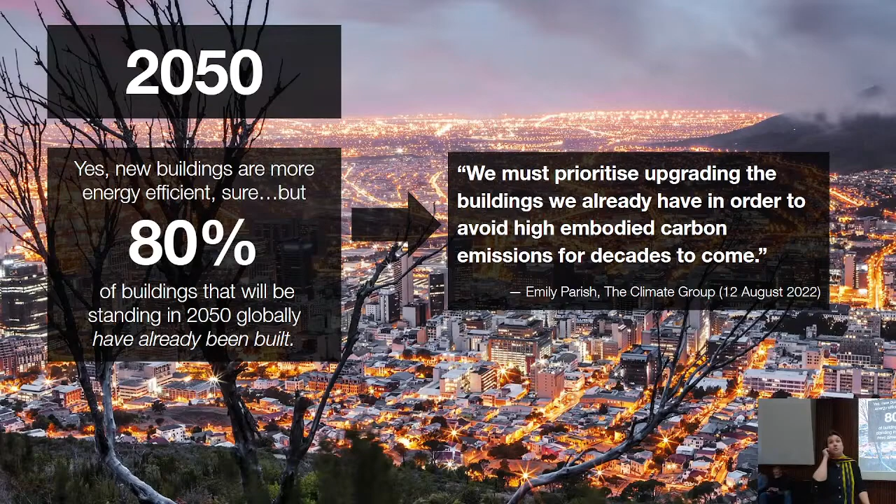In Africa, it's a bit different. 70% of the African stock still needs to be constructed. Africa is a little different, our context is different, but it's the same trajectory, right? And every 20 years, every city doubles in Africa, in size, scale, complexity, magnitude, everything. There's a lot of work to be done on this continent for the built environment.

But if all the buildings are already built, and they will be built very soon, in your own career, your 5-10 years that's coming, how long do we have to take care of these buildings after they are built? It's not just build the building, we already have the building. What about the life of the building?

On average, a building wherever you go, is 70 years old, including the one you're sitting in. It's a human lifetime. That's how old buildings are. They live longer than us, much longer than anything else we're busy with. There are buildings older than the industry of motor cars and vehicles. Buildings have lived beyond that. Buildings have lived through industrial revolutions. They're still here. So the average building is 70 years old.

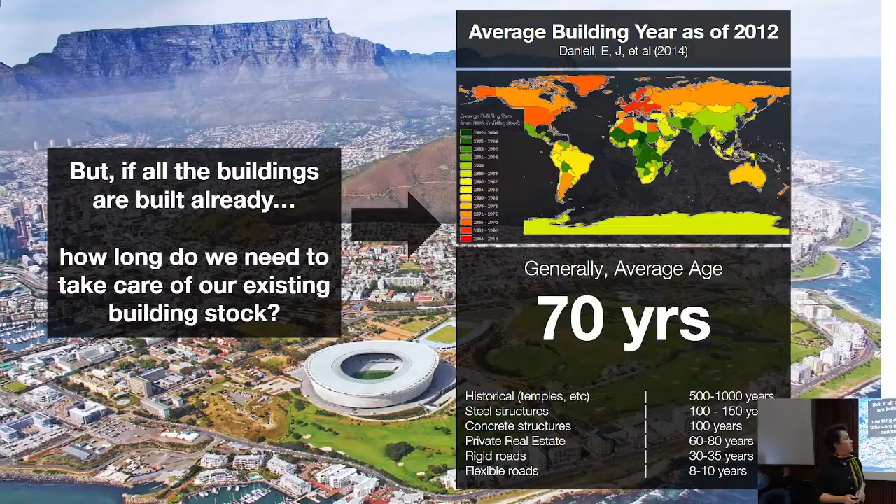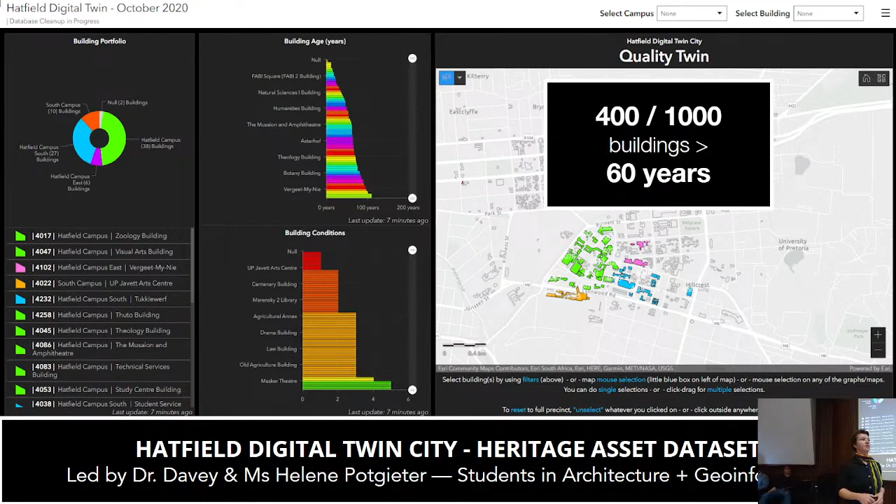You can see that in Tuks. The University of Pretoria is the second largest asset owner in the city next to the city. We have 1,000 buildings, literally. Right now, 400 of them are already heritage buildings, and that number will go up.

So if we talk about the life of the built environment and your job in it and the real big picture in your own lifetime, never mind beyond your lifetime, let's do some napkin math. I love napkin math. Let's pretend the average building design and development phase, average, maximums, is 3 years, right? Yes, there's exceptions now and then, and so it goes. But the average building takes 3 years to develop and design, right? And let's say it's 3 years to construct, okay?

And if you work in a high-performing environment, like Europe, America, Ireland, whatever, those high-performing regions, that time frame is shorter. It's almost 12 to 18 months to build and construct and be done with it. But that means 6% of our effort of a building's life is in design and construction, but 94% is in the life of the building. Operations, maintenance, use, energy, etc.

If you go to the doctor with this problem, what would he tell you? We need to think differently about the built environment. We can't do it alone. How are we going to create a human habitat that thrives? How are we going to do it in Africa? How are you going to do it in your own lifetime? What is your legacy going to be when you leave this building?

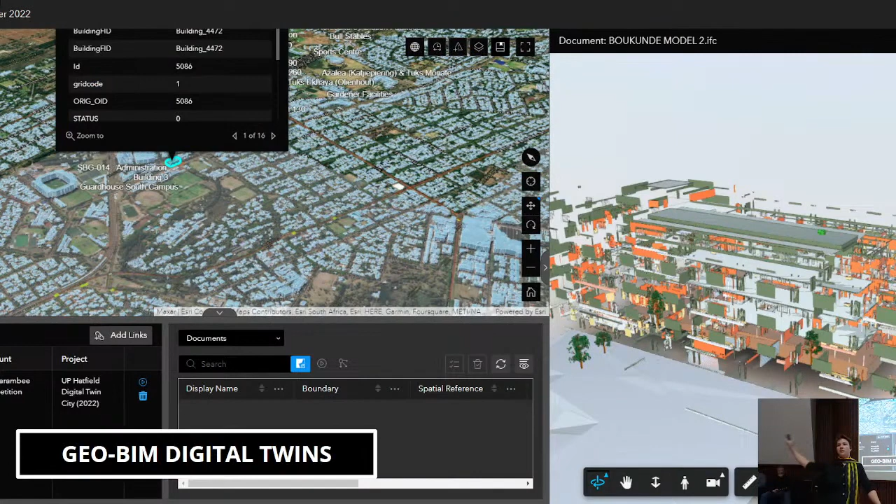If we can't build these future worlds if we don't do it together, it starts with human behavior. We can do amazing things with technology. Go and have fun this afternoon, go play with the toys. We can all do these things, but if we don't do it together, it doesn't matter at all. We can do incredible things, but if we don't do it together, there's no point.

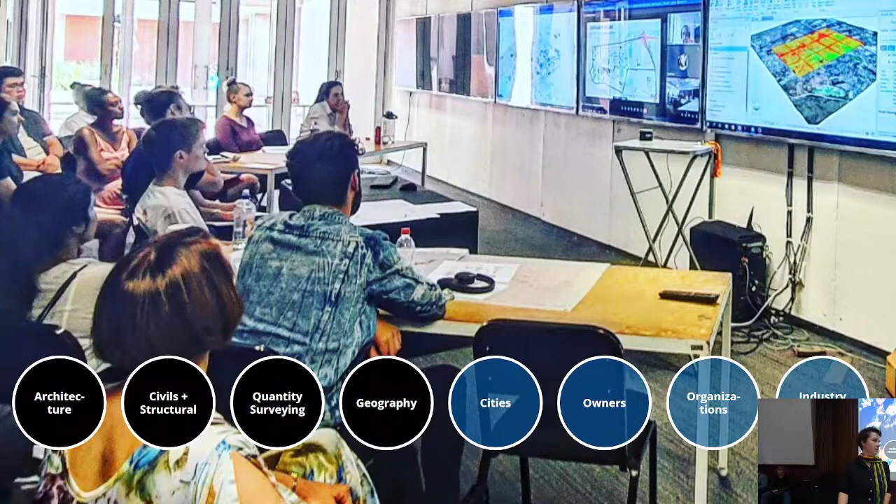And together means everybody must share a reality. And the digital world helps us with sharing that reality. It's very powerful in that way. The digital world helps us to come to consensus, to agree, to negotiate from the same page, to see the same world. The digital world doesn't mean it's not part of the physical world. It's interlinked. It's the same thing.

We're living in a social, digital, physical, interconnected 21st century. Doesn't matter your discipline, your story, your background, your personality, that's the truth. And the built environment must work together like that if we want to see thriving cities in Africa. End of story. So with that, our goal today is not to show you perfect projects.

That's not the point. The BIM Community Africa is here to show you how to behave through BIM to create projects. BIM behavior is the way we want us to shift culture, and we'll show that to you today.

With our team, I want you to start recognizing that it's a collective activity. There's no single person here in the BIM community or the value chain that has a hierarchy above someone else. It's a stupid idea. We're working horizontally, we're working together, and that's the culture we need to shift.

So with that, this is the community's ethos. I'd like you to think about it when you go into work. Leave your badge at the door. I don't care where you're from, I don't care what you know. If you're not working together, you're not working.

Do something good for somebody else first. We'll talk a lot about that today. And take care of the future while you do it. If you don't do any of this, don't bother working.

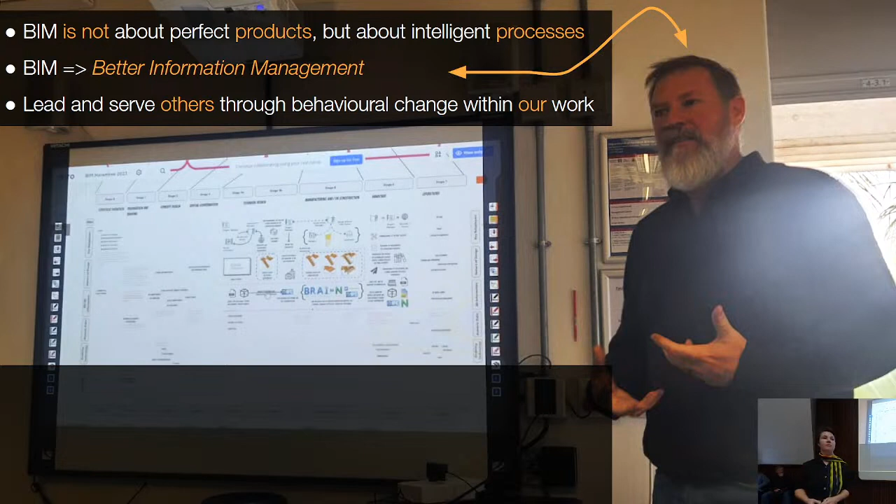Maybe BIM, as a catchword, is about better information management for someone else, as opposed to just for you. You don't matter in the team, it's us. Maybe BIM is about leading and serving others to help them come along on that journey. Maybe that's what BIM is about. Maybe we need to do that by changing our behavior, and show that to you.

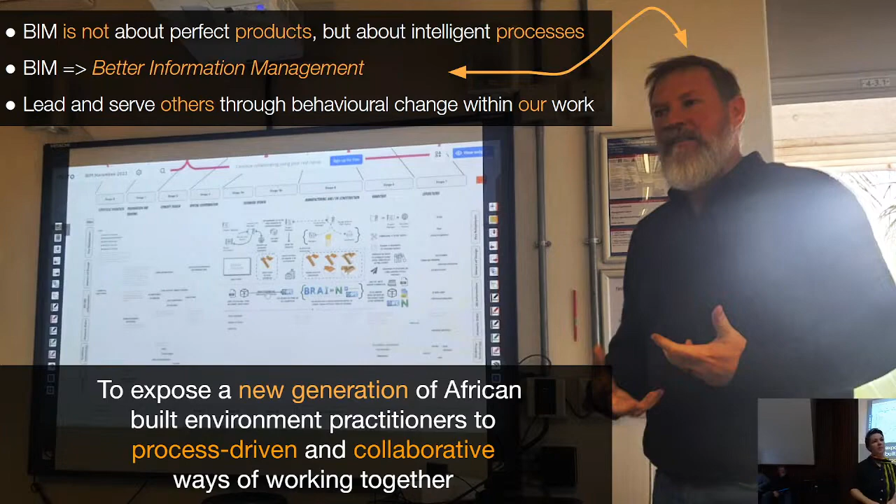So maybe BIMHarambee should be about making a new generation of African built environment experts and specialists who know how to do process-driven work, and who know how to collaborate together. Maybe that's what BIMHarambee is about, not the textbook. And with that why, our strategic definition of why we BIM, we planned BIMHarambee together to create the most value for someone else and to serve someone else. Do you see how different that is to traditional construction and design? Do you see how much better that can be if you work together from the start?

We have not designed the project, we have not lifted a pen to paper. It's not about that at all. It didn't cost us a cent to build consensus. So we planned BIMHarambee around those two questions as our strategic definition.

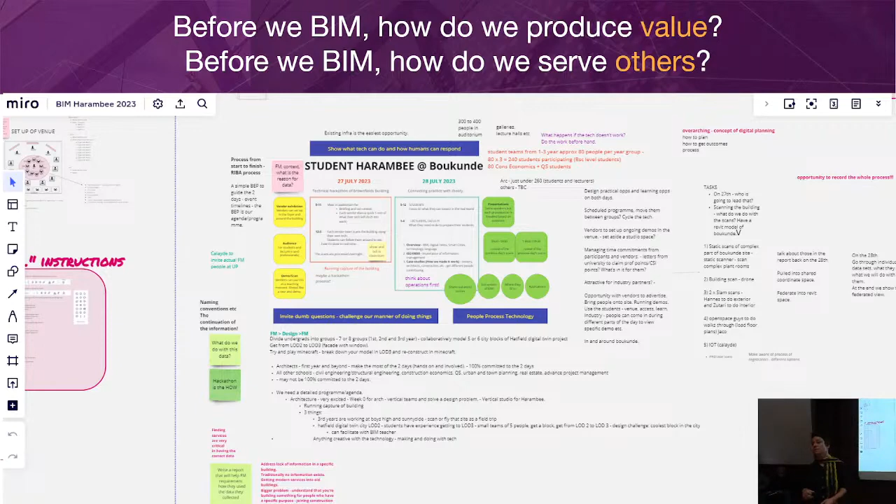So now I'm going to hand over, just so we have a bit more context, to Richard Matchett, who's going to talk about the what and how of BIM, and then we're going to launch our simulation for you. All right.

Morning, everyone. I'm a civil engineer, and I didn't really know much about BIM until probably about 7 years ago, when I started hearing about this acronym BIM. And since then, I've learned a lot of different things about technology and processes, but I've had to explain my job to my parents, and that's helped me break it down to manageable ideas.

When I explain it to my mom, I say, Mom, it's a process where we create information and we share that information in teams, and we use it basically to build stuff and to create value on stuff. Now, she understands that because my dad's an engineer. She's married to a family of people that are involved in construction. And it's been great to tell her that, Mom, we don't draw stuff anymore. We model stuff. And she's, what do you mean? Why? Well, Mom, because then we're able to share the information with teams and we get over all those bottlenecks that Dad always complained about.

And that's been a really great way to think about it in my own career, is as professionals and as you guys move into the workspace, that's the ethos that we're embracing more and more in the professions, is sharing information so that we can achieve really good purposes.

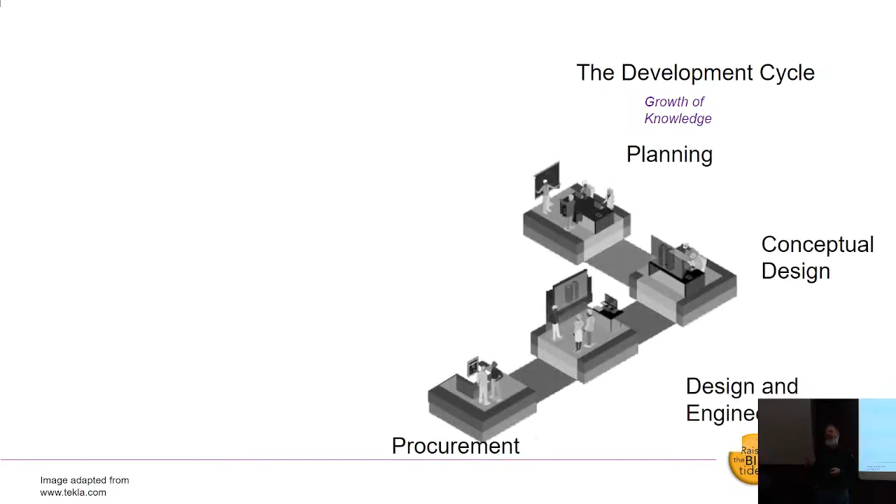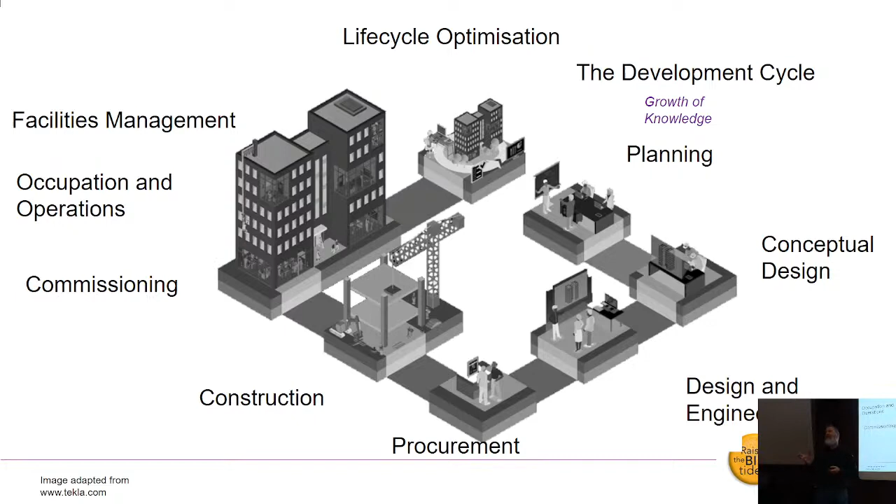Now, the way that this works practically is any project that you're going to be involved in is going to go through multiple stages. And so if you break it down between these different stages, there's a lot of work that goes into each stage. And ultimately going from design through construction into having an operating facility, whether that's a building or an airport or a pipeline or a dam. And that value is then created for the world that we live in, for the generations that are to come and for us to enjoy.

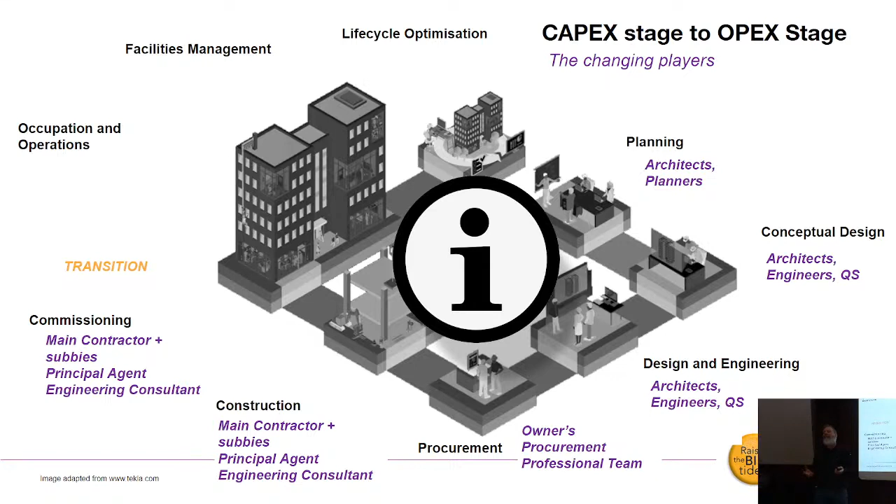But as this gets created, you have this incredible shift from us that are involved in projects, we create things, to other people who are involved with actually using those things. Historically, that's been a great challenge. Historically, the transition from the building stage to the using stage has been the challenge.

One of the big challenges is when you finish a project, there's a truckload of paper that needs to be given to the owners or operators, and it's very impractical. Whereas with digital or electronic information, it opens the doors to be able to search and find information and make better use of it.

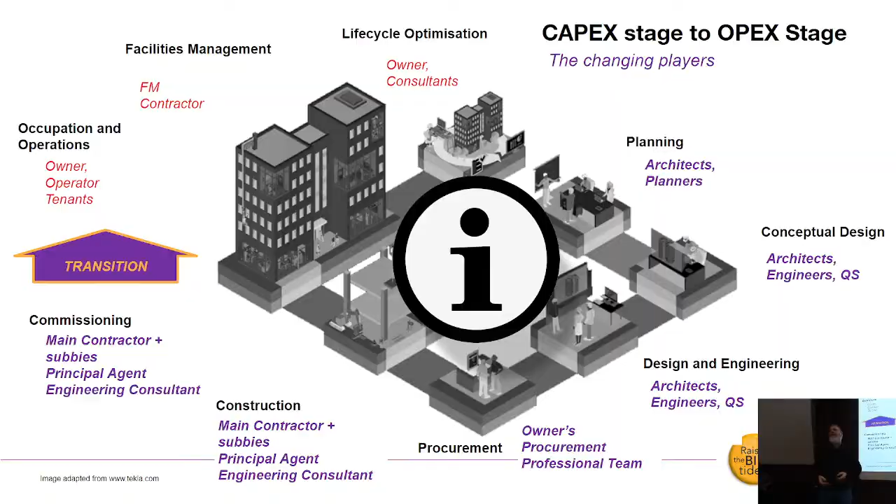As all of you know, we're in the smartphone generation at the moment. Information drives decisions, information helps you understand what's going on. The process of BIM is partly creating, partly sharing, and partly empowering the entire life cycle of assets that we're involved in. Now those truckloads of information, it's still truckloads of information, but now it's digital.

Anyone who's got a Dropbox account knows that your information gets messy very quickly. So it's very important to manage information, right? Otherwise it becomes a hassle rather than a help.

So you need a few things. Number one, we need a standard, because all of us, wherever we're going to end up working, need to work in a consistent manner. Otherwise it's very hard to align and get things done.

So South Africa, and most of the world, is busy adopting this ISO standard, which defines how to create the information collaboratively, how to share it, how to pay it forward, how to consider each other in the design, construction and management process, and how to make sure that the information is of a high enough quality that it is useful. You need a team.

We spoke a lot about teams, and one of the basic fundamentals around working together is: the better you share, the better you work, quite simply. The more you share, the more information drives understanding and common knowledge, the less mess-ups you get. That's a fundamental principle in any project.

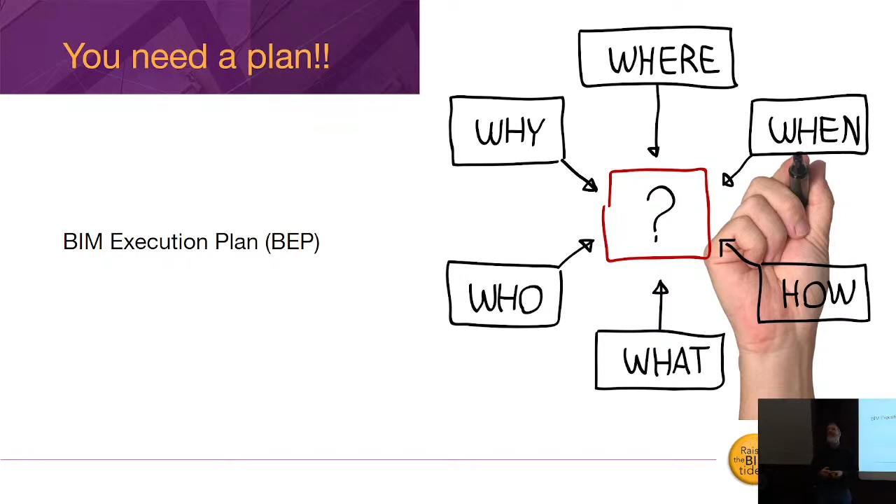You need a plan. You need to know who needs to do what, when, how, why, and that needs to be spelled out. We'll talk a little bit about that this morning.

Very important, you need a workflow, because you start somewhere and you end somewhere, and the steps in between can be very complicated. So more and more it's important for us to map out those steps in detail one by one, so that each person in the value chain knows what they need to do, how they need to do it.

And then you need some tech, you need tools, from computing power to measuring instruments, from things to understand what is, to other things to understand what will be, and to communicate that with all the stakeholders.

This is a bit slow, isn't it?

So how does all of that relate to our work? I'm going to come back to these stages and say that this stage definition that Khaled introduced just now is incredibly useful to plan the workflow throughout any project, from the beginning to the end.

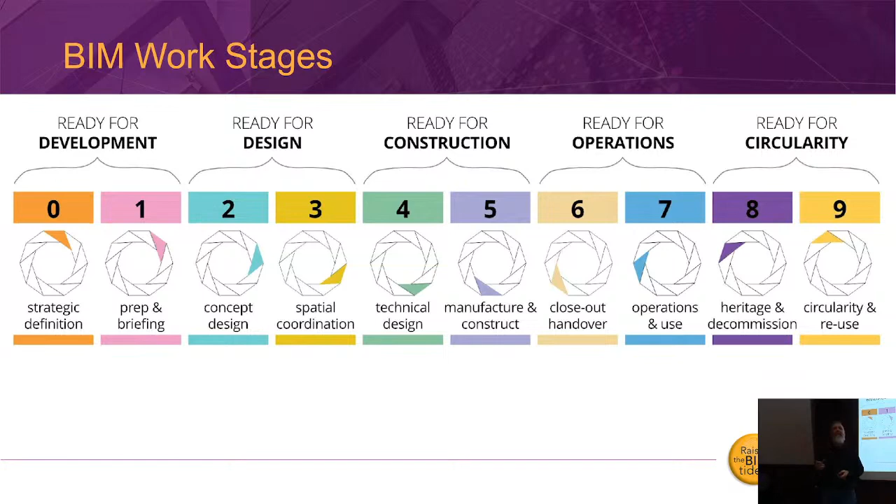For the rest of this morning's session, and then we're going to go and have a look at the exhibits and demonstrations, we're going to spend time looking at what happens in each stage. Then when you go out of this room, you will see what we've talked about briefly now in practice, and you'll be able to talk to companies using technologies or workflows exactly as we're explaining now. You'll be able to go and ask them specific directed questions.

And I encourage you to think about how is your area of study, where are you going to end up working, what type of work are you going to do, and how does what you see today spark an interest in how you think you're going to be doing things.

I also encourage you to take what you see today and blend it with what you're learning, the textbook knowledge that you guys are gathering at the moment, and start seeing today's information as a method of how you're going to implement the theory you're learning and turn that into practice in the world you're moving into.

So let's have a quick look over here. Strategic definition: we've got to find out what we're going to do. Khaled's going to talk to that a bit.

Then, as we get going on a project, before we actually start doing the math, drawing the drawings, figuring out the quantities, we've actually got to get that plan down. And a project plan is project specific—no two projects are alike. So at the beginning of a project, the whole team gets together, like the photos of us sitting together, and figures out how we're going to get this thing done.

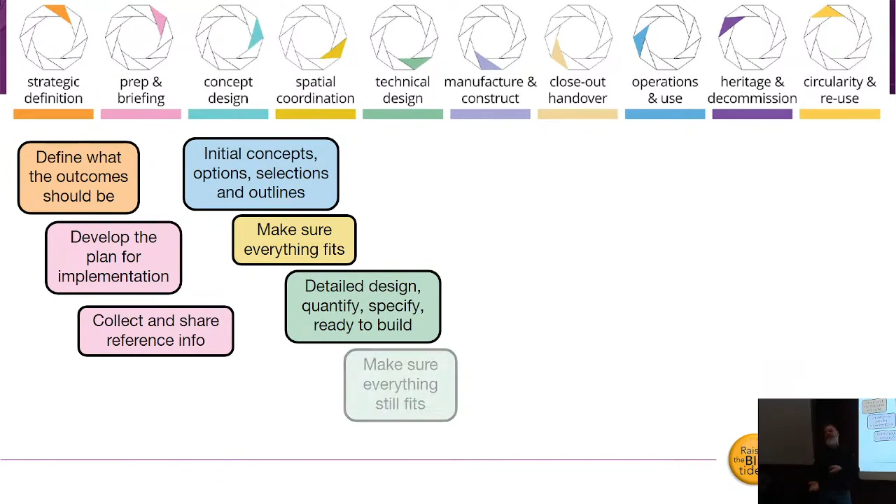From that baseline, we create our initial concepts, make sure everything fits together, then go into detailed design and planning, where all the different disciplines get together to make sure it still fits. Something that happens all the time is you get a great concept, start designing it, and things fall apart. A big part of what digital technologies and design enable us to do is keep fitting the pieces together through the design and development phase.

Then someone tenders for the work and starts working on it, and things get really exciting. The yellow machines arrive on site, you start digging holes, building walls, building things. As a professional team, we need to make sure we can see if everything is still on track and happening as planned. At the end of construction, is the end result properly recorded so we can hand it over into operations, go through the operational phase, and ultimately arrive at end of life—preserve or change.

So that's what we're going to do now quickly for the next hour or so. I'm going to put this workflow on this screen, and as we go through the storytelling, different people will come tell you what's happening in each of these blocks. As we move through this, new speakers will come up—keep track of where we are in the storyline and in the demonstration.

Here's a quick hint: this building has been set up with the pink areas over there for collecting reference information, in the basement. As you go through this timeline, we go up the floors. Depending on where you start, and how we leave this room afterwards, you'll be able to see everything happening in sequence. So keep track of the presentations on this board, and you'll be pre-educated when you arrive at the stands.

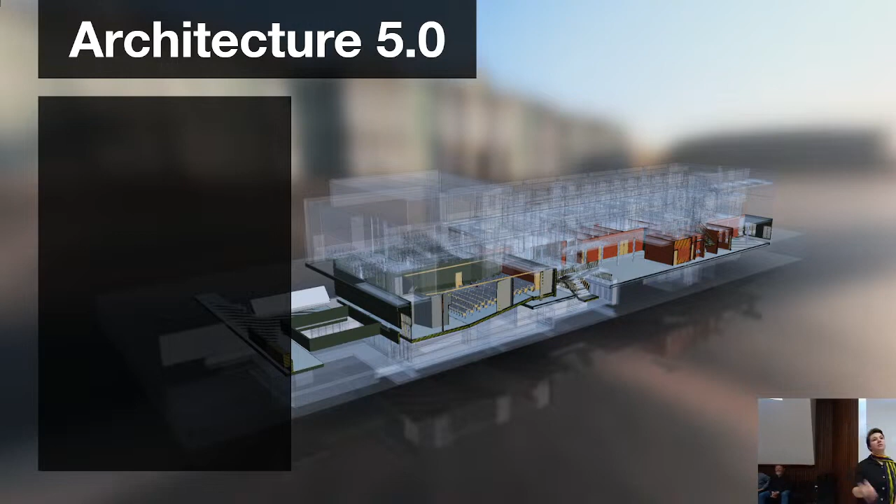We looked at our building and asked, what kind of project do we want? The interesting thing is, I as the owner didn't come up with this idea, the team did, because we were talking about it together. I still am shocked by that. As an architect, I should have the big idea.

But the team, because we were talking early on about purpose and culture, said sure, we must stay within our constraints. We have a limited budget, we have no money, that's a fact. So we can't go crazy on that. That's a constraint.

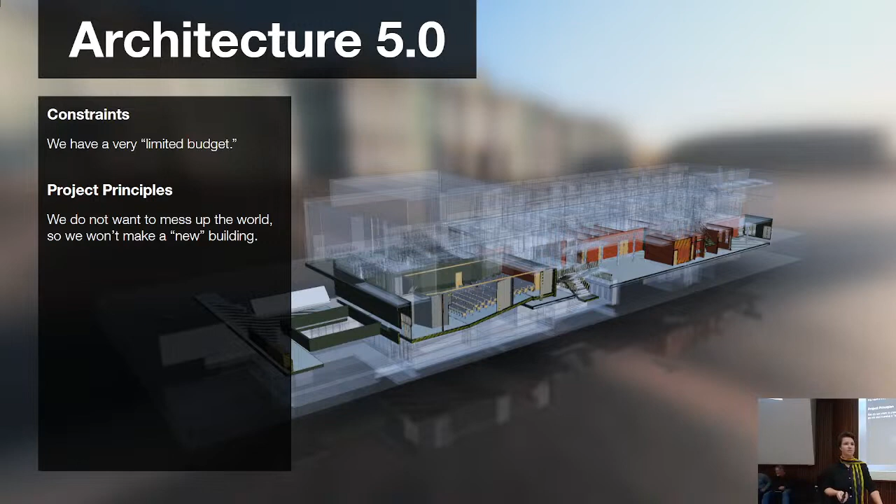It must be more awesome than any other building, and it must be awesome for students and for learning to take place. That's a principle. It must be way cooler than Engineering 4. Way cooler.

With these principles, the team said, shouldn't we build a kind of building that aligns to these things? The most sensible thing to do is add two floors to the top. The building is strong enough, it's good enough. That's our plan. It aligns to all the principles, it fits into the constraints, it sets up our values together, it's possible for us to do it. And we've not lifted a pen to paper.

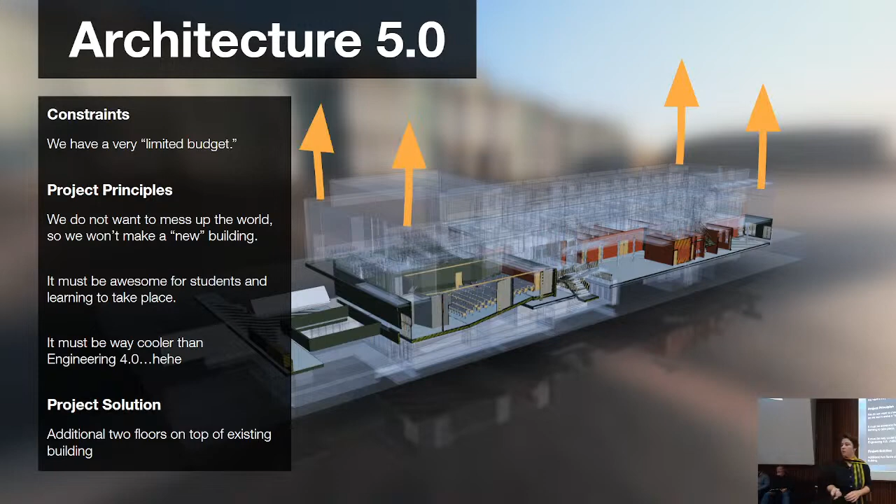So here we go, Boukunde Architecture 5.0, that's the project for us. We want to put cool new labs and workshops on top, and a lot of creative environments to practice and make a mess in. It must show off all the topics we're interested in, and these topics will change.

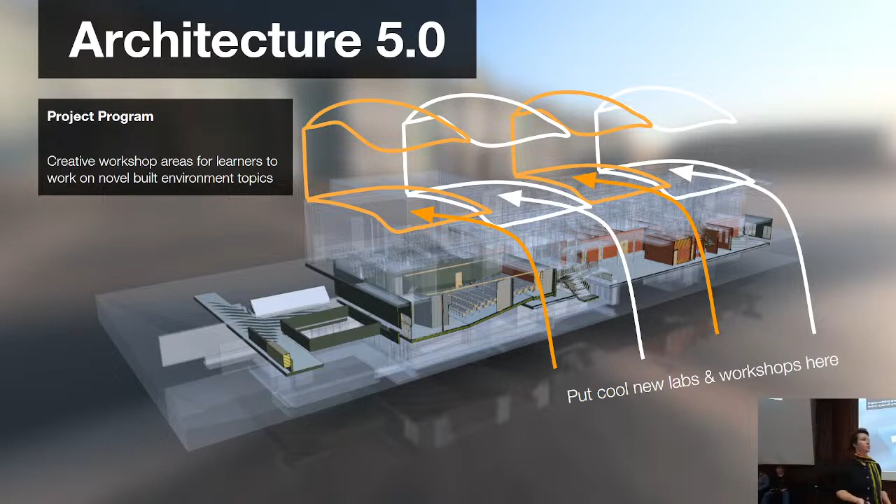These topics today include the York timber chair and timber construction, living walls and green buildings, flexible facades, climate adaption, cities and futures, and digital learning. This is the stuff we care about. We need to practice in that. We want those labs to do it.

So as a team, we're very clear on what the project is and what it isn't. We have not lifted a pen to paper.

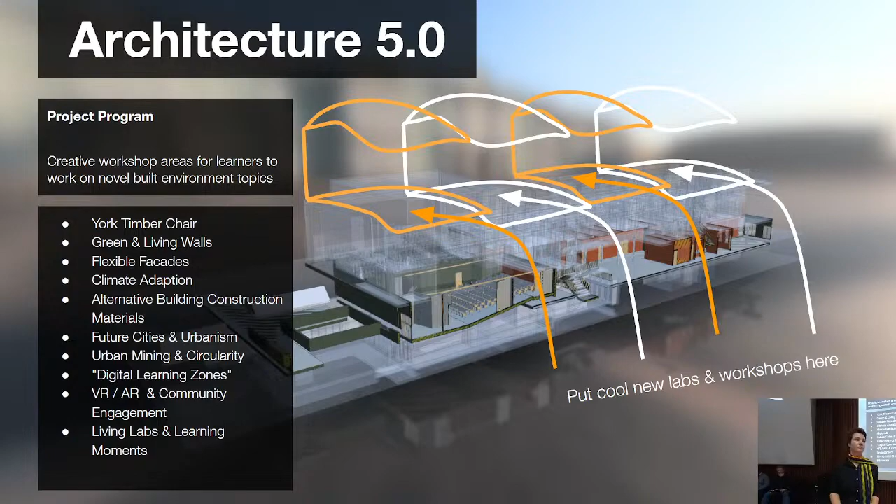My job as the owner is to say, how do I take care of my team? What do they need from me to be successful? And what kind of information will the building owners of the future require? How do I act responsibly now? In BIM, I need to take care of four things.

We call this the information needs, and there are other ways of describing it—read your book. But for me, my job is to take care of the OIR, AIR, PIR, and EIR string of information: the organizational, asset, project, and employer's information requirements, for the people who use the building forever.

So I'm not going to go into detail, but the question I ask myself as owner for the OIR is, what information do we need from this building and its design process to ensure that we make good decisions in the future and others can do their work? In other words, I build a client to-do list for now and for later, right at the beginning, before we lift pen to paper.

I also start asking questions with my team, and I find out from them what essential information they need to be able to do their job well. I don't prescribe it, we work together. I ask them, how can I serve you as the owner, as the client?

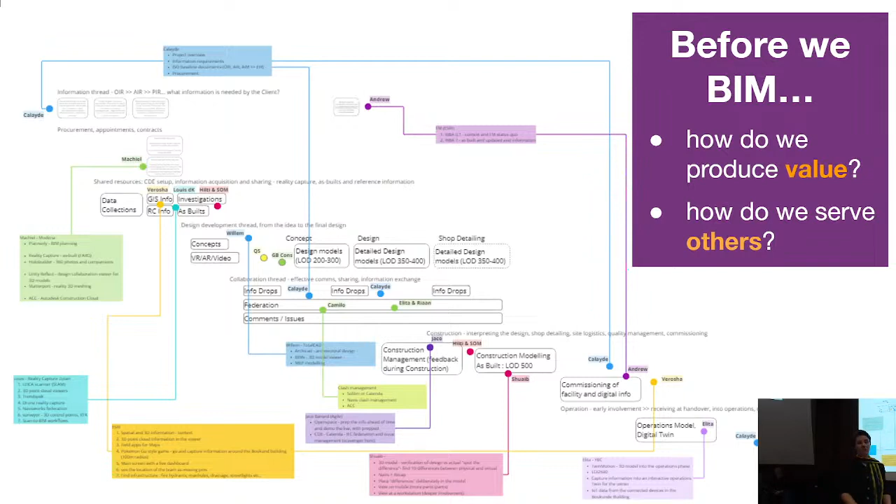This costs us nothing to have a responsible conversation. Nothing. So now that we know how do we produce value and what we serve and what kind of building we have, now I can say, let's start. And this is how BIM kicks off.

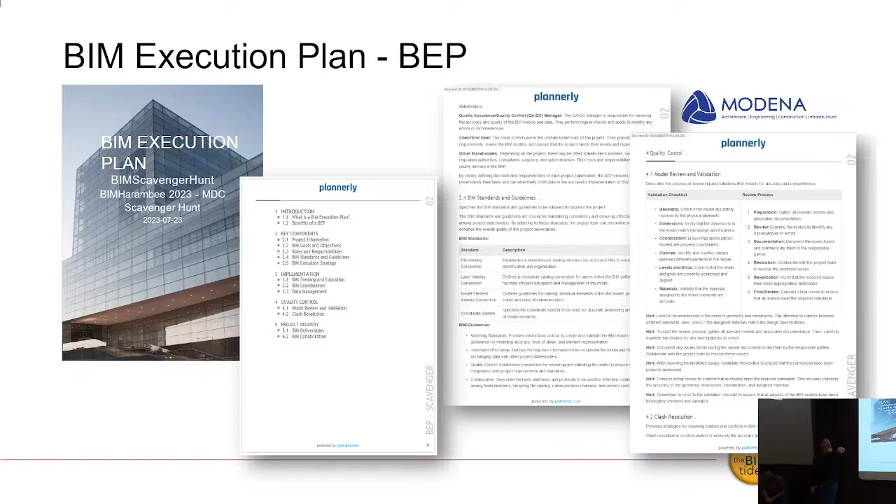No, it's you guys. Wait. There you are. All right, I think you're going to press that one very close to the machine. Okay. Stand in the block. Stand in the block. Stand in the block.

So what is geospatial information and why is it important? So geospatial information is the concept of the whole Earth having coordinates. So you already make use of geospatial information on a daily basis, and I'm going to prove it to you. So let's say you want to go from point A to point B. Let's say from UP to a specific shop in Johannesburg. How would you get there?

Waze. Maps. Am I right?

Waze and Maps make use of coordinates from point A to point B, and that's how you navigate. But that's just in a very inaccurate form. So what we want to speak about today is how to take that information and make it more accurate—think about better accuracy.

Point it at the computer. Yes, sir. Yes! Outside. Thank you, all right.

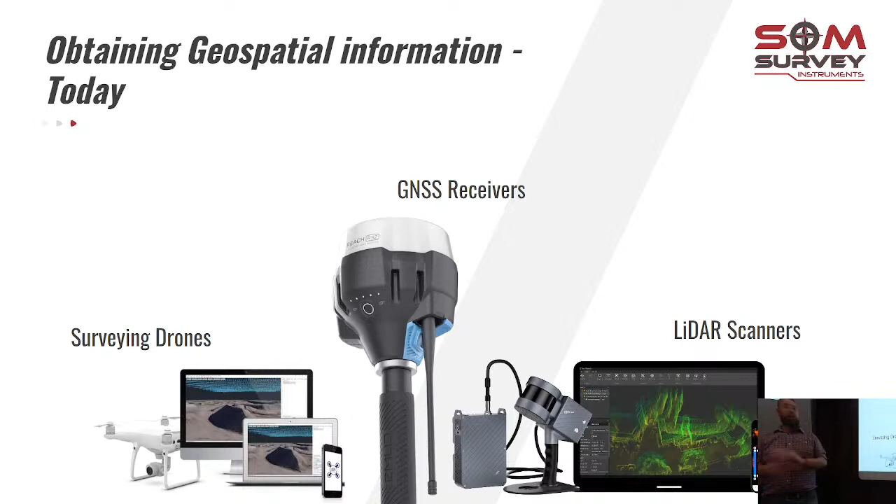Louis de Klerk, I'm from Zutari, and I'm our reality capture lead there. We're talking about collecting and sharing information, and as an industry we call this basically reality capture. It's a term that's been around for a few years now, but it's not that common yet. To summarize, we digitize real-world assets using technology and software.

Where's the rest, Richard? Something is... Keep going. Okay, I'll just skip over that one.

Then drone photogrammetry. There's no real such thing as a drone survey. A lot of people ask me for drone surveys, but they don't really exist at this point. So we stick to drone photogrammetry.

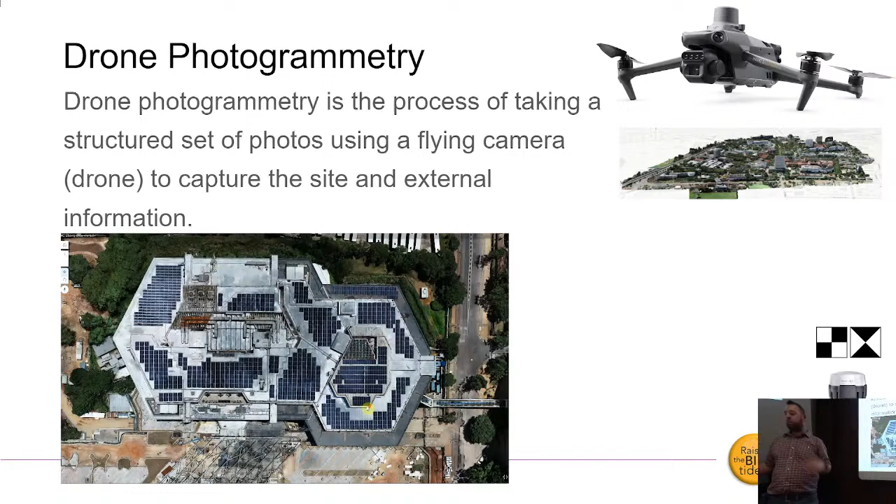Next, we'll need the inside, and that's where 3D scanning comes in. Using LiDAR scanners, you get them in handheld SLAM - simultaneous localization and mapping, for those who haven't heard that term - or the more common stationary scanners on a tripod. You move them through the building, all in various accuracies, but they capture the insides of a facility very accurately.

Putting a high density scanner in a room like this will take 2.5 minutes to capture each and every piece of wood, speaker, light fitting, everything that's in the room, and you'll have it in 2.5 minutes. Obviously you need to do a lot of work downstream to create the actual model, but having that reference information is the step on the inside.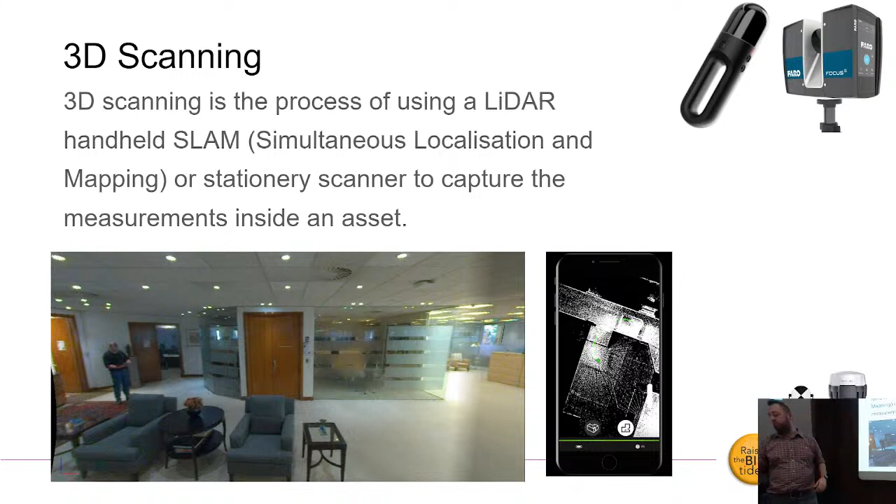We supplement that with 3D images, and OpenSpace is going to talk about that a bit more later, but having the visual component brings in the condition of what that element actually is.

And then what does all of this deliver? In the end, we want to talk about information. We need information, not just pictures. The pictures are great, but we need the survey control, so we need those coordinates. The drone photogrammetry provides us with point clouds, 3D meshes, ortho photos, digital surface models, digital terrain models.

So a lot of information used by various parties downstream to plan and design their work. The 3D scanning provides us point clouds - it doesn't provide us a model, it provides us a point cloud. So again, the reference information to take us to the next step, plus 3D meshes and the 3D images.

And all of this has quite a bit of benefits. We've got rapid data acquisition - you can capture a building like this with a scanner in a day easily, and you've got all of that measurement information while the drones are running on the outside. That information is geometrically accurate, like VM said as well, talking about relative and absolute accuracies - that's where this technology comes in.

Creating virtual site visits - Glade mentioned carbon emissions and vehicles and all these kinds of things. Bringing a site that's sitting in the middle of nowhere, or 500 kilometers from your office, back into your office where the rest of your project team can actually view that information and understand it. There are projects where people designed some of the biggest bridges in the world, sitting with a lead designer and 10 people underneath, and they've never been to the site where that thing is being constructed or designed.

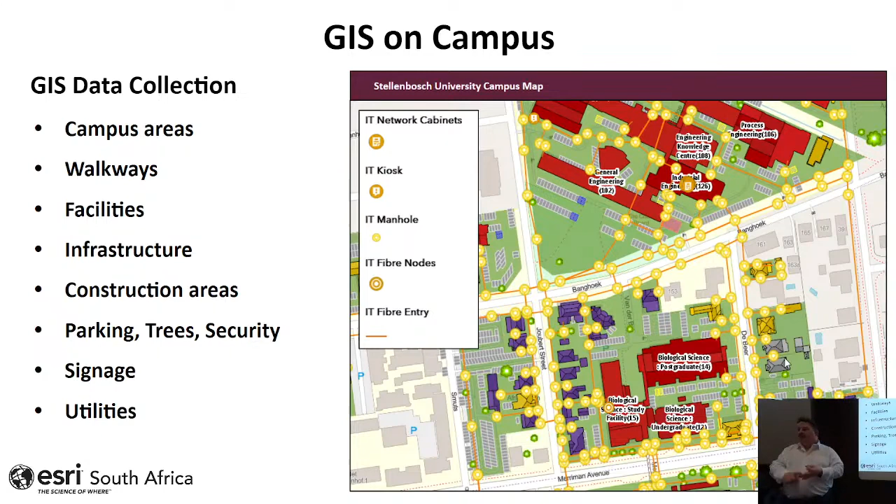So GIS brings all of this together and helps us to understand the environment. What we also want to show, and our stand down in the basement, we're going to show you a little scavenger hunt where you can go outside and collect some of these assets. The idea is that you would use a mobile application, which can be disconnected as well, so you don't have to worry about having data.

So you can go out, it will navigate you to the location of that asset, you can verify the location, you can verify the condition, and this is where you also use devices that can be very accurate. But then you can go back to that meter or that transformer and actually get the condition assessment of that. So these are the type of examples of mobile applications. No programming required, you don't have to develop this. This is out-of-the-box tools that you configure, and you add your own type of questions and things in.

So what are the main takeaways that I want to leave you with? GIS is about where to build, about the site selection. It will help you to do the site survey with all these fantastic tools that are being showcased here today as well, but it will help you to find out where is the best location. We use it within the retail, within banking, within mining. All these type of things are being used even with agriculture. Site selection is quite an important part of GIS.

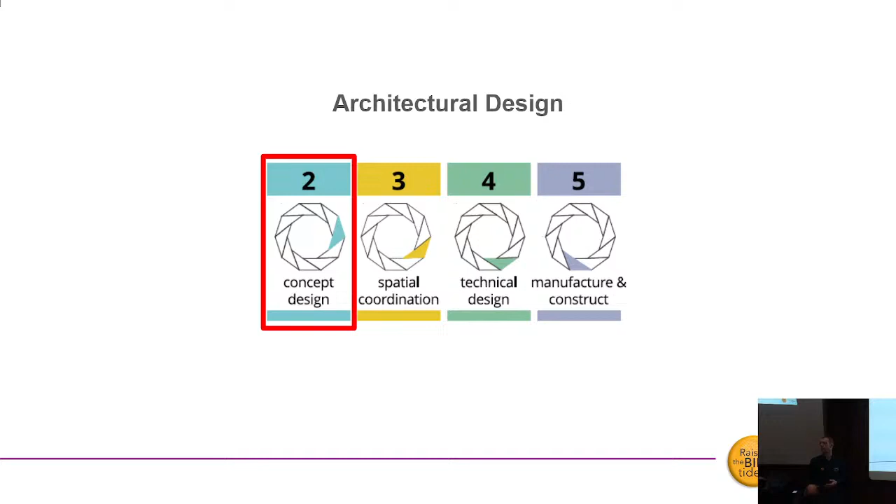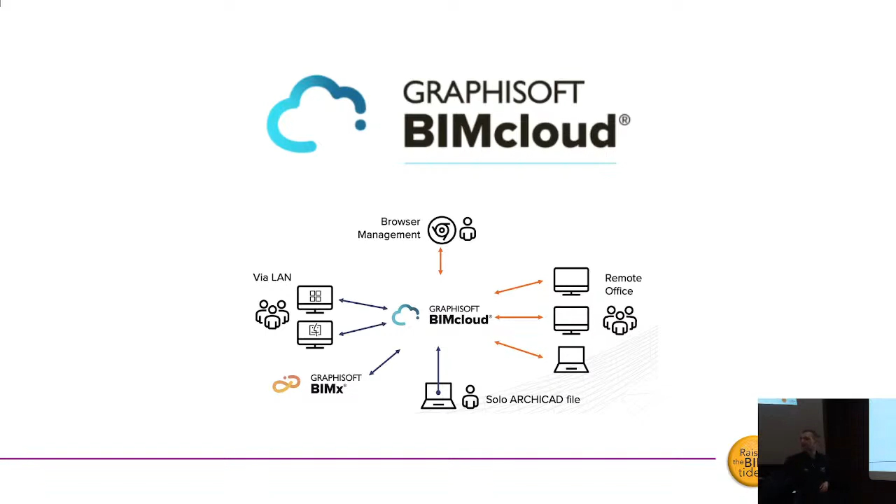The architectural team collaboration, the internal collaboration of the architectural team, we use the Graphisoft BIMcloud, which is basically allowing us to work remotely over the internet with no delay. And obviously, as you guys know, with pandemics and all of these things, it has become a necessity. So our team consists of 3 members: Ronel, who is in KZN, we also have Gert, who is in Cape Town, and then myself, who is based inland.

The BIM authoring tool we used here is ArchiCAD, which supports an open BIM workflow. This gives flexibility for all sorts of vendors to partake, making it easier and more open for more people to bid, instead of having a closed ecosystem which would mean fewer possibilities for certain people to join the project.

Starting off, before we could do anything specifically, we had to import the existing data. That could vary from a specific 3D format - in this case, as the BIM execution plan stated, we used IFC format, an open BIM format, Industry Foundation Class, and other information available. Not everything was in 3D, so DWGs and PDFs, whatever you might have, we had to bring in too.

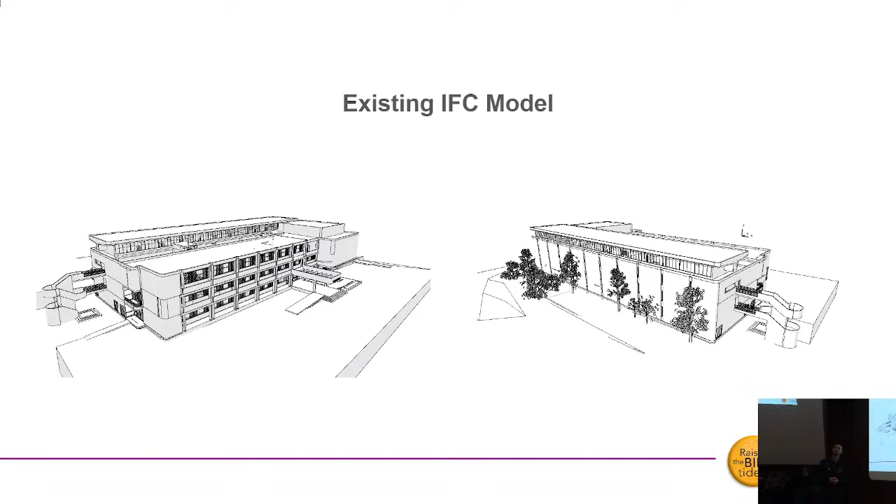Then we shared the project on the BIM cloud, which is only internal at that stage. There's the existing IFC model which we've imported - before we did anything further, we got this from the client, and I believe it was done in Revit. We found the IFC file on the CDE and imported it.

It's quite important to get certain things right from the start in a project, as mentioned before. There are different things you would do to make informed decisions. A lot of decisions are made in the beginning of a project, at stage 0, 1, but also at stage 2. Certain tools like energy analysis, which is quite important, can help us make informed decisions in the beginning of a project.

I think it's quite important to make sure we involve all project stakeholders from the start - that includes facilities management. I don't think that happens often in today's projects, and I think it's important to consider that concept, because if everybody's involved in the beginning, we can know everything from the start and address it accordingly, rather than having to make plans down the line, which usually happens on site.

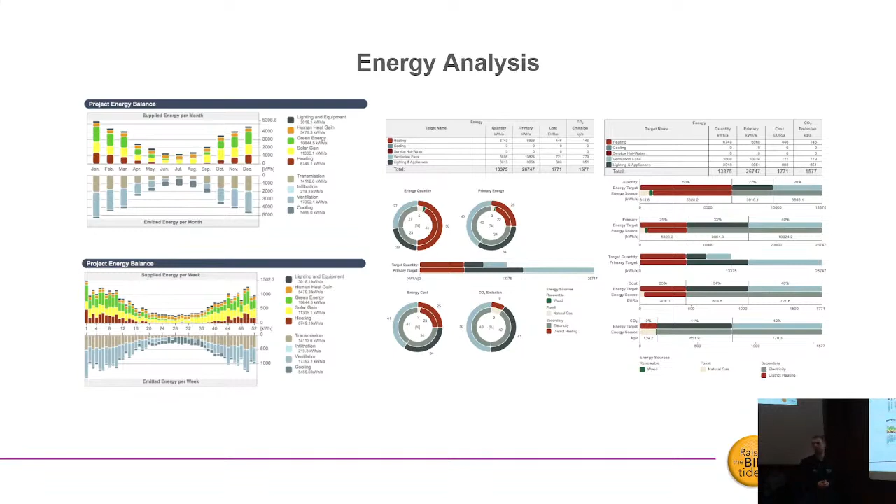So how do we collaborate and talk with the rest of the stakeholders on this project? There are two different options - in this case we use IFC, Industry Foundation Class, and BCF. The IFC is for model-based coordination. We share IFC files back and forth each stage, maybe not so much in the concept stage, but going further definitely - that process repeats where we export IFC files for the rest of the professional team. They then import that information and do what they need to do, and collectively we develop this building.

The BCF is mainly for issue and change management. Any changes or issues, once all of these IFCs are federated into one model, allow us to do things like clash detection, which you'll hear about more later.

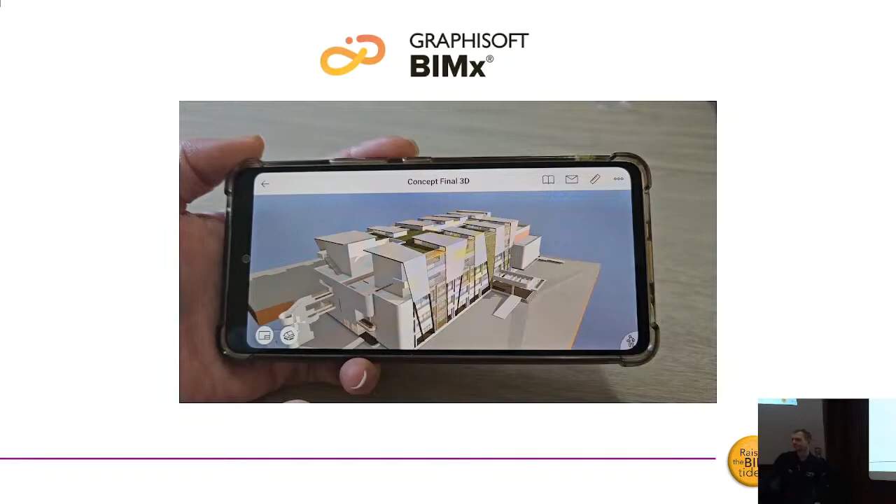One of the tools that gets used quite a lot is Catenda. Camila is going to come and tell us a bit more about that.

There are a number of different tools in the market, and I hope as you look at the examples we're showing you this morning, it's not because we want you to use specifically that or this tool, but to help you see what this functionality looks like, and keep track of this golden thread of information from beginning to end, and how the different tools would enable you as a professional to keep track of the information and make sure that together the team is able to yield the outcome desired by the client. Camilo, over to you.

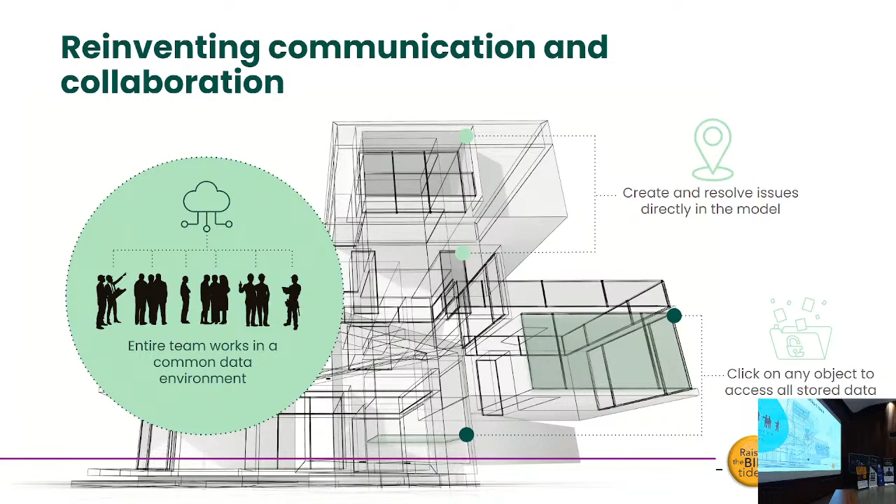Furthermore, we are not managing our own design. We are managing other people's design, and we're managing through different devices. We have the computers. We used to have the table where I learned to draw. Now we have the computers, but we have the cell phones, we have the tablets. And those things are becoming part of our life, in a way. Part of that environment is communicating not only in that space, but through those devices that we are using. And they are evolving. Maybe someday they become part of our bodies. I don't know.

So this is the central environment that is receiving all the information from all the different consultants. And I think what's important here, and I want to show you this typical screenshot of where I work and spend a lot of time, is that it's not a place where we drop the information. That has changed. It is a place where we take that information, process it, and then make decisions based on those conclusions. It's becoming a new paradigm in that sense, because it's becoming a space by itself where we can make decisions based on what we pick up from those models.

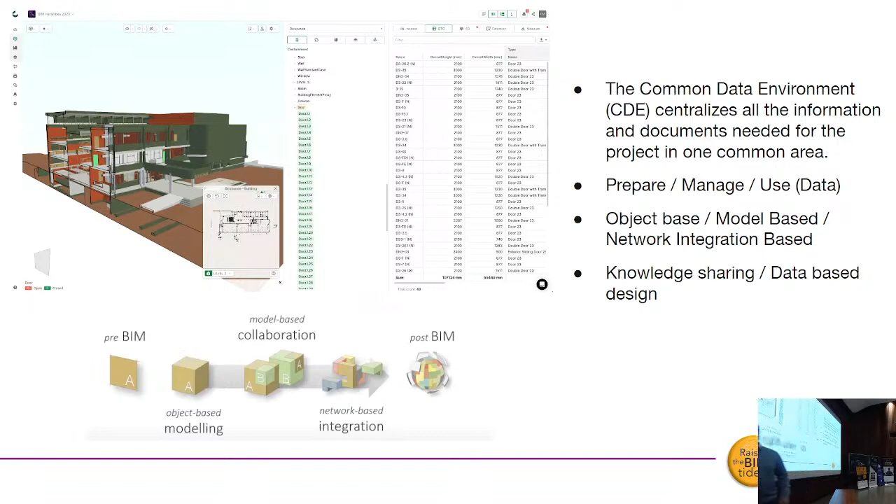It's not just a space where to drop information. This is a very important concept for you to use, because as architects in the future, you will be dealing with drawings, with models, but you will also be dealing with other types of information, like data, spreadsheets, that have nothing to do with what we are used to, but are part of what we have to deal with in the future.

So at this stage in the project, we've got a concept that the client loves. We've got all this information, and we're really working through it, making sure that we know what we need to know to avoid the problems.

Oh yes, that's yours. That's yours. We've got the same iPads.

Now that process of management of information, I want to spend a few moments talking about this. In the old days, we used to have drawing offices, drawing boards, and a drawing office manager, someone who would make sure that all the plans were filed properly or were hanging in suspension files. If you walk around this building, you'll see a lot of that.

In the new way of doing engineering, architecture, construction, and facilities management, that information is digital. Now, I use the example of my Dropbox account, which is a nightmare. Yours are probably the same, so don't laugh too loudly.

In the project teams, there is a new coordination role emerging, a profession of people highly skilled at administering information platforms. Because if those information platforms go out of control, it's a nightmare, just like your Dropbox account. If you've got 50, 100, or 1,000 people on major projects working on the same set of data, and that data is not properly organized, you can imagine the ripple effects through the projects. So those of you who are tech inclined and love that type of thing, consider that as a career direction.

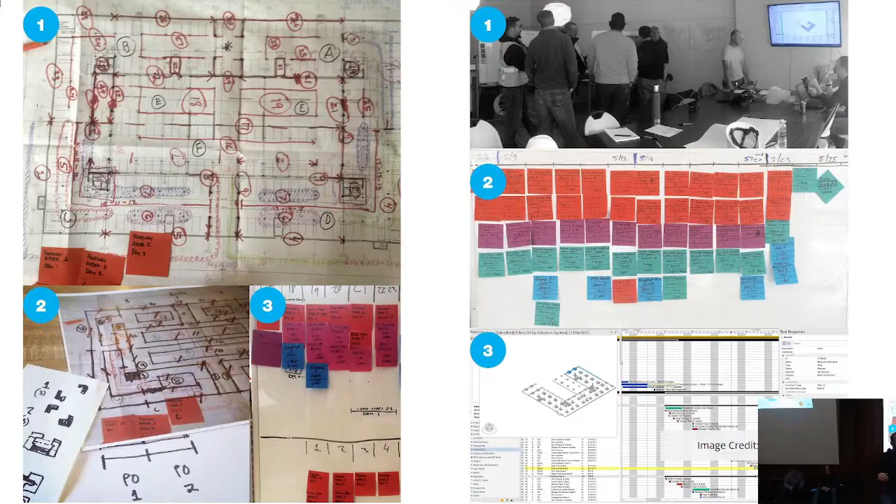We are qualified, some of us in architecture, civil engineering, some of us are electrical orientated, but we've taken those qualifications and adapted it to our BIM operability. So what we do is we assist with the teams where they get really busy in the design area, and this is where it's all nice air conditioned, and this is the pretty side of it. So that's where Camilo comes in with his architecture, and he does the design. But what happens on site is something completely different.

So we take this information and we do the clash detections, we coordinate it, and we will advise. There are some areas where it's influential from one discipline to the other. The architect would have his good idea of what would be a beautiful building, but he needs a wealth of engineers behind him to back him to make that dream come true. Each one of them share the same dream of having the asset for the owner at the end of the day. It's where these shared ideas come together, and that's where coordination becomes critical.

Coordination can also influence the tracking of materials, how it gets designed, how it gets manufactured. This is where all the different softwares come in. There's a lot of guys that use SolidWorks and ArchiCAD for product designs. And that then goes back to the architects using all sorts of the IFC files, the Autodesk files, that all the different ones come together into one CDE, the common data environment.

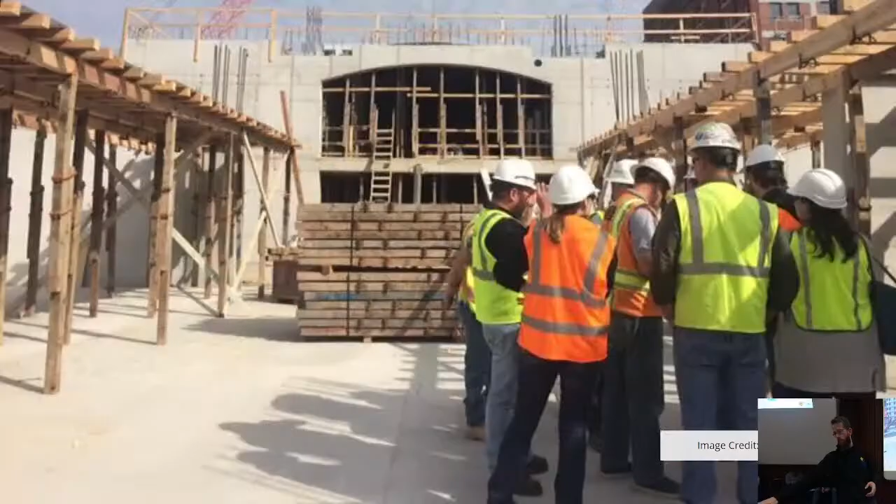To give you an idea, those kind of ideas can be used where if you've got central city planning, where there was an existing building that by hook or by crook something happened, an earthquake or act of God, that needs to be demolished, but there's skyscrapers around it, so we need to worry about our direct environment, and then spatial planning becomes important. The actual logistics of the materials needs to be coordinated, because if you've got a building being constructed, that needs to be planned. So we help with those coordinations, and you guys are welcome to come and check us out.

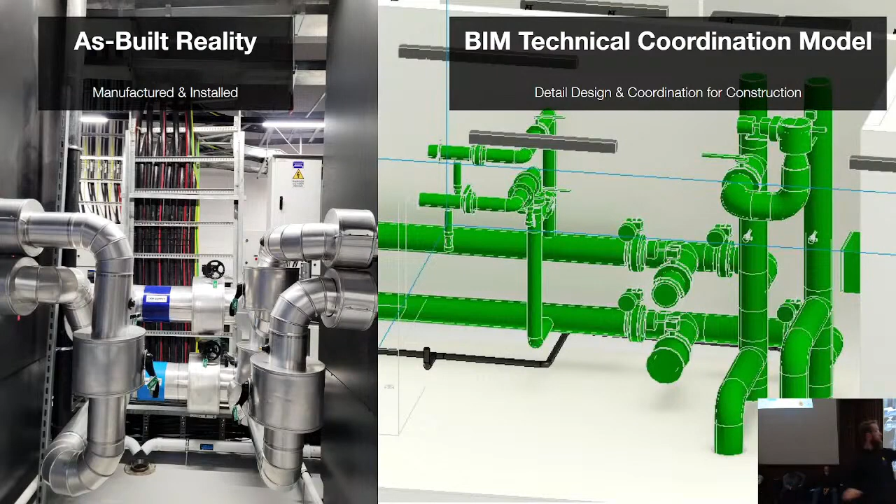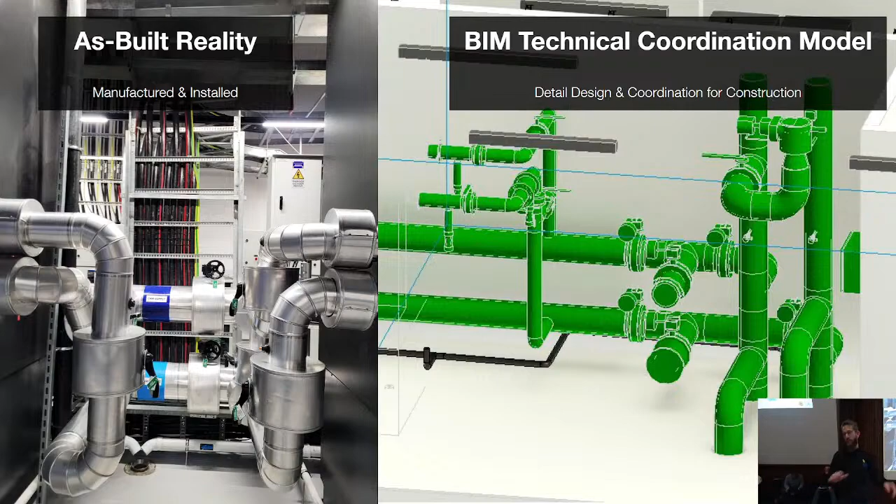This is what was designed and what was built. So it looks pretty in a nice hot office. And then those guys with the hard hats, they go and build this, and that is nowhere close to what was designed. Then it goes back to that data capture that Sam and the other guys were talking about. That data capture goes back and says, okay, the facilities manager looks at his drawing and the valve's on one side, and he gets there and the valve he needs to close is actually the other one. So he shuts the wrong building off.

So those kind of plannings and coordination, that comes into play. This is one of our live projects at the moment. We are still very much coordinating this. This is what it looks like before your pretty ceiling goes in. I guarantee you that the area behind the ceiling looks like that, believe you me. So the architect designs his pretty ceiling, electrical engineers make it light up, mechanical engineers make it comfortable for us to sit and breathe. That's where we come in.

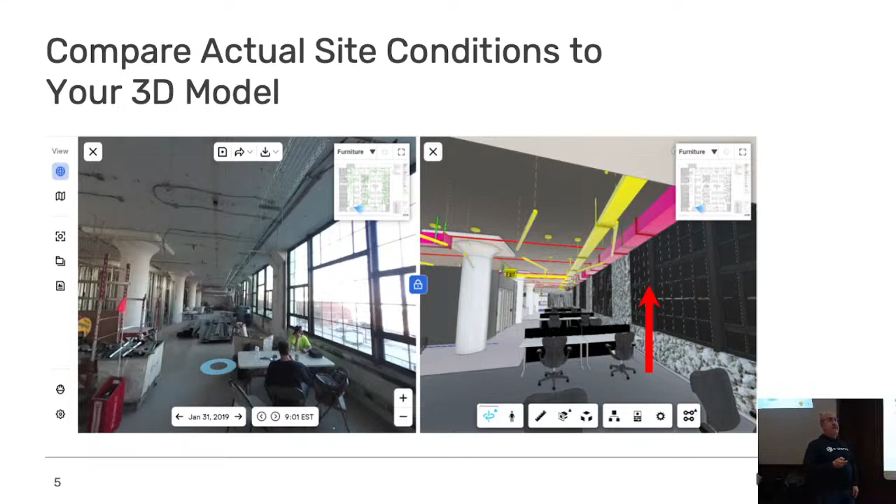Now, once we've got the reality capture there, what we're able to do is start comparing the design to what we are busy building, and that way a consultant can sit in an office a thousand kilometers away, not needing to go onto site, comparing the design to the reality capture, as Louis explained earlier. So this is just another form - this is not scanning, this is capturing. It's photogrammetry of that condition on site on a specific day. There's a whole bunch of other features as well.

Scanning traditionally would have used those scanners we put onto a tripod - it is a process we need to go through, and those scanners are sometimes very expensive. But should the person on site happen to have an expensive phone like an iPhone Pro or iPad Pro, those phones have built-in LiDAR scanners. And with OpenSpace, we are now able to do a LiDAR scan of a specific object and send it to somebody sitting a thousand kilometers away to be able to measure that specific object.

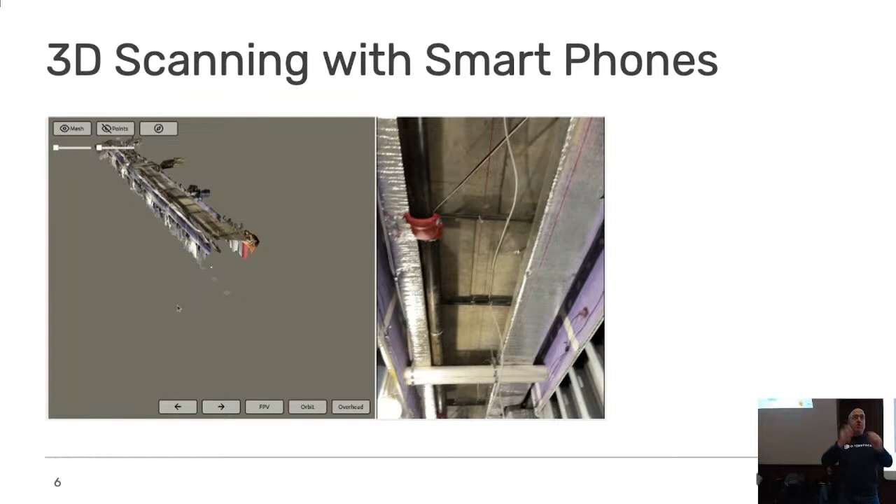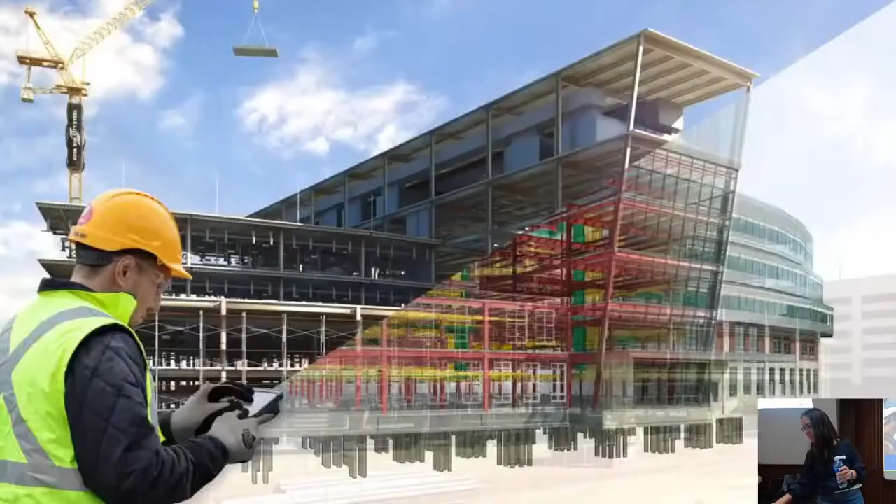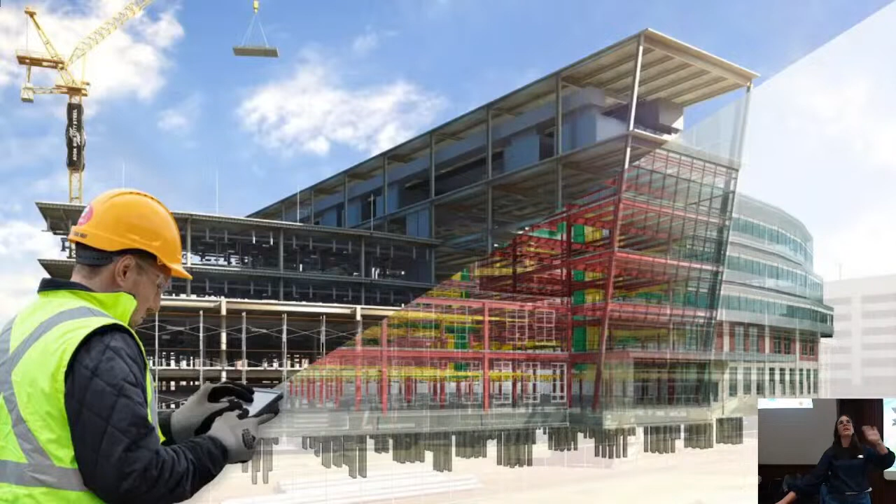Now at this stage in the BIM journey, I'm assuming all of my colleagues and teams from stage 0 up until stage 4 did everything perfectly. We've got a BIM model with information in it, things were coordinated, we had accurate information from the start, tight briefs, information requirements, and I need to take all of that and go build it. There's multiple different workflows that BIM can play into - I'm not going to list all the technologies: machine control, prefab, root cause analysis, checking what your contractors are doing, so many things.

The main thing I wanted to talk about is we've heard a lot about scanning and reality capture because it's a big part of what happens in the beginning - making sure we knew the environment and the building before we started building. Now that we are building, there's a new aspect of reality capture. Yaku spoke about taking those photos, but you can build on that by not just having 360s, but in some cases also doing LiDAR scanning. You can see different pictures - from a drone, a phone, different scanners - and from there you can start doing construction monitoring.

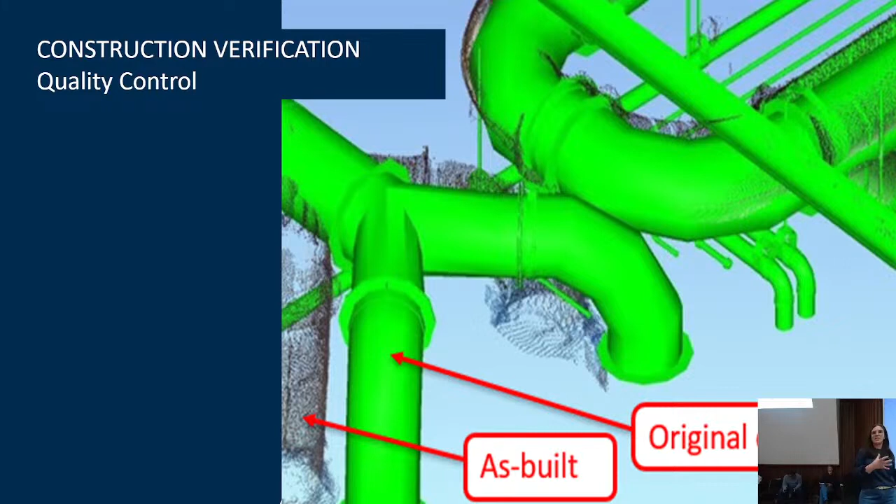Basically saying, guys, this is what we had to do, this is where we are, how far off track are we? From a scanning point of view, scanning your site isn't necessarily something you'll do every day, versus putting something in a hard hat and walking around, which might be something you do every day. The idea is that when we capture this information again, we can check how far off we are. We have this design intent and all this information given to us - what are we actually building?

Now, as someone currently renovating her house, I deeply feel the pain of not really knowing what is there. But from a scan, you can compare your scan of the actual building to what was designed, and hopefully pick up some of those discrepancies and course correct - not just in terms of placement, but other types of discrepancies like floor leveling, buckling, those types of things.

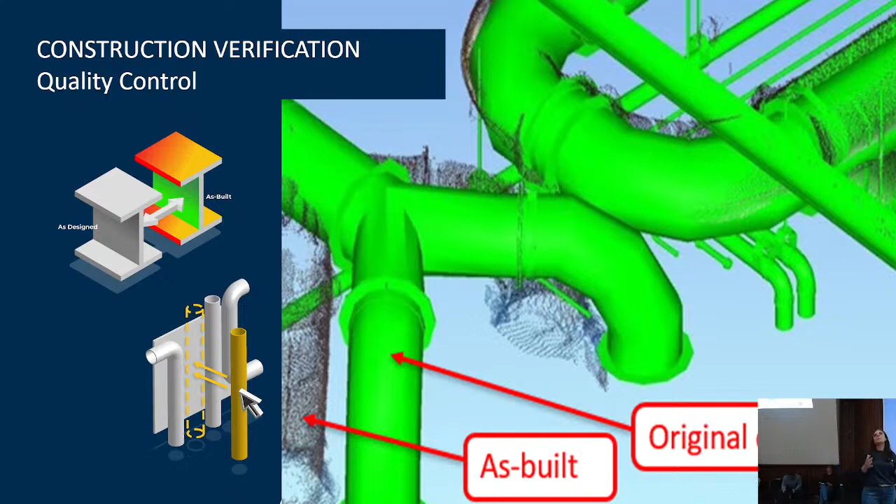And in an ideal BIM world, we then adjust our model to make sure - if the pipe was meant to be here, and I built it here instead, let's update that in the model, because like Lade said earlier, we need to think of the next person, we need to pay it forward. What happens after this is I'm paying this forward to the client, and the client will really like to know where his pipe is, so that when he starts upgrading that building in 70 or 50 years, we don't see any issues.

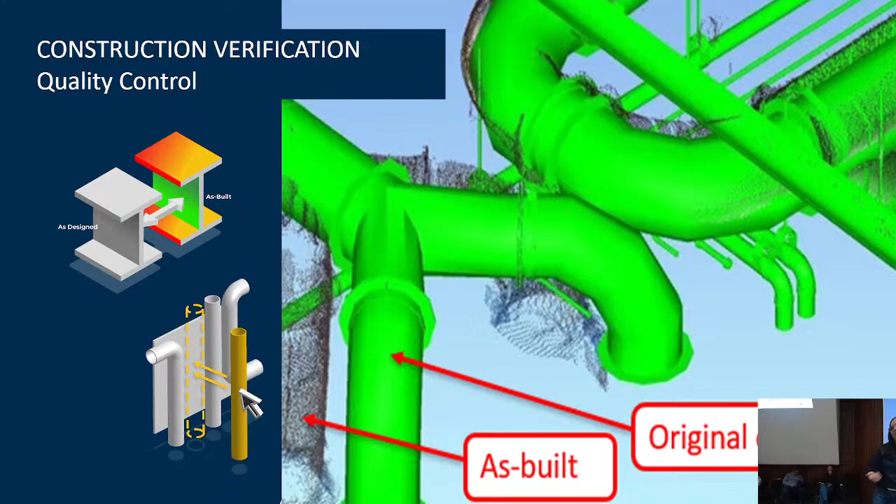Now, part of that construction verification is managing the quality of things. In terms of managing quality, how do you capture and take that information so it's not just thrown into your own personal Dropbox folder, where someone needs to figure out what to give to the client at a later stage?

From a quality inspection point of view, I think all different types of inspections and aspects of what happens on the building site can be integrated into what everyone else is doing. It's that idea of connecting the teams, connecting what's happening on site to those in the office or those not on site all the time. So in the digital world, these quality checks, inspections, snags, safety, all of those things can be done in a digital space referenced to what else is going on.

It plays a big role in construction management, because we've got all this information. How do we use it to our advantage when we track and manage stages, look at RFIs, and the potential change orders that come from that? What kind of defects, what kind of budget impact are we looking at? We've heard the client has a very limited budget, and pretty sure they also have a tight deadline, because it's always like that. Those things are linked into that common data environment, and all of this collaborative effort isn't lost when we go into the construction industry.

So at this stage, we're basically sending the baby home, saying no more nurses, no more helping, here, take care of it. If we look at some of these stages similar to what we've seen before, and some of you may have heard these terms from the BIM world, this is really the final stage where things go from a project information model to now an asset information model.

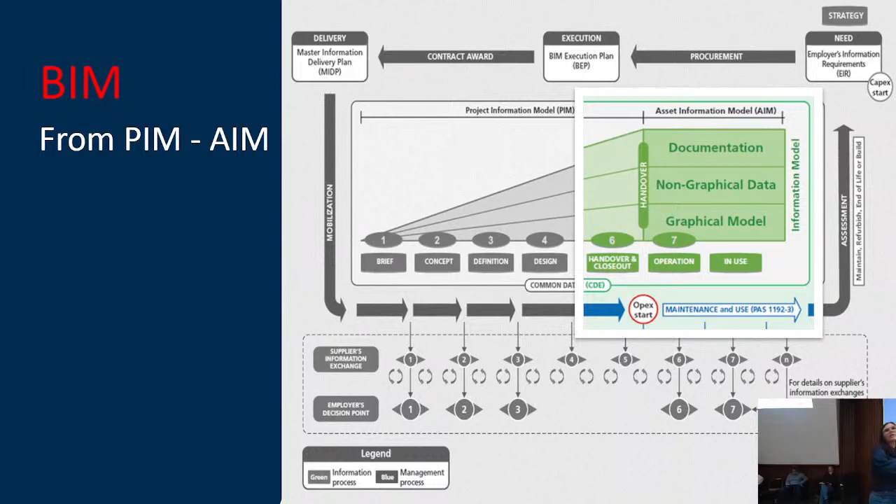This is where all of the things that the building owner, and Khaled, said in the beginning—this is what we need in order to manage this facility, this is what we need to get out of this—we now need to get that information, hopefully not all in pieces of paper in a wheelbarrow dropped off at our office. We need a BIM and a better way of doing that.

So again, we're assuming that everything up until now happened accurately—our building, our construction went as well as expected, and everything that happened during that construction stage was accurately captured in a common data environment. It's time to really check all of our assets, do the commissioning, make sure those defects are fixed, that all of our warranties, manuals and spec sheets are in one place, well structured.

When Richard spoke about the Dropbox, I too have a similar Dropbox. For anyone who's seen extreme hoarders, I sometimes feel like we're moving into this new world where we're becoming digital hoarders, because you just say let's save this, let's save this, let's save this. Which is great because it doesn't take up physical space, but it's very important to be a structured digital hoarder, if I can put it like that.

So from a technology point of view, the generation of the turnover documentation takes us back to what happened in the beginning, where those information requirements were set.

You need to now make sure, this is the final step, that the information we've generated meets those information requirements, and also the information we're handing over meets those information requirements.

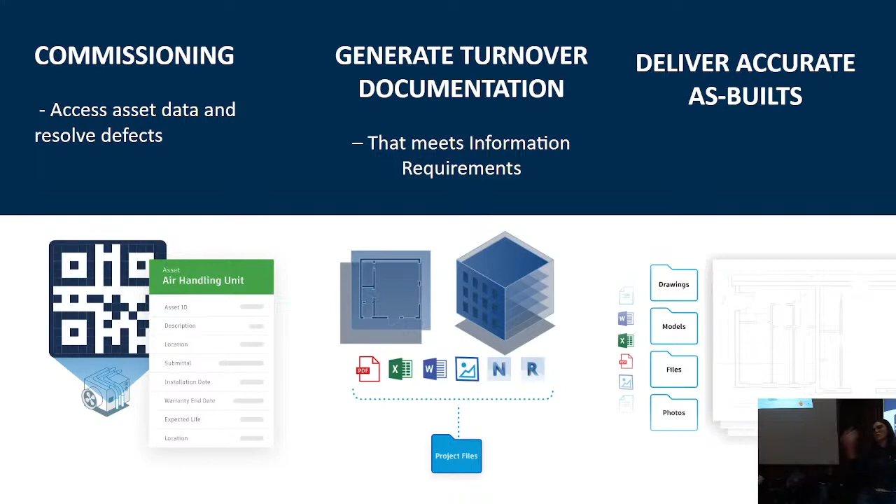And again, structured. So all of this, we're on the top floor, so if you want to start with the end in mind, you can go top floor down. Hopefully the client actually gets accurate as-builts, or as it was actually constructed, because that really pays it forward and adds massive value to how that project information model is moving to the actual asset information model. And all of this in a common data environment.

Multiple different ones, I can tell you which one I like. Structured information that someone can find and hopefully use 10 years down the line. Think about the format and usefulness of information to an asset owner down the line. Do they know where their pipes are? Do they have their manuals? Do they understand their mechanical equipment and everything else that's part of their facility? That was my 5 minutes. Well done.

So now this is a part of the world that is very new. Traditionally, a lot of the construction world is focused around building stuff. And as Khalid's intro reminded us, because so much of our lifetime's experience of a built world is already built, the focus of being able to manage things well is becoming sharper and sharper. So in this next section, we're going to talk about how that information might help us, what that information looks like, and what type of information we might be interested in for managing the facility, managing the future Bokende building.

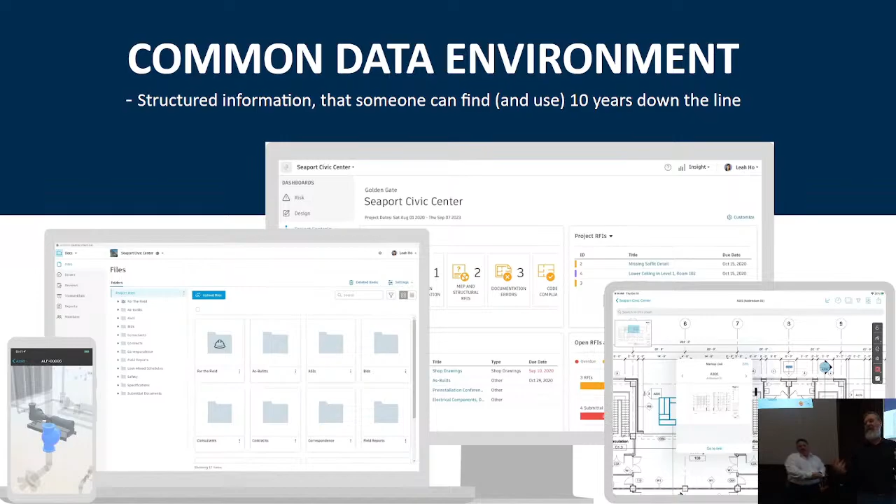So Rudolf, you're going to come and show us a bit more about how information systems can help us understand what information is being used in the operations and use stage. Rudolf? Thank you, yes.

So what I want to talk about is that throughout all these stages we've been discussing, Esri provides a tool called ArcGIS GeoBIM, which brings these two worlds together, where the construction cloud and the GIS side talk to each other. This creates a common data environment as well, so that we may not be on the same servers or environment, but can talk to a different organization, different platforms.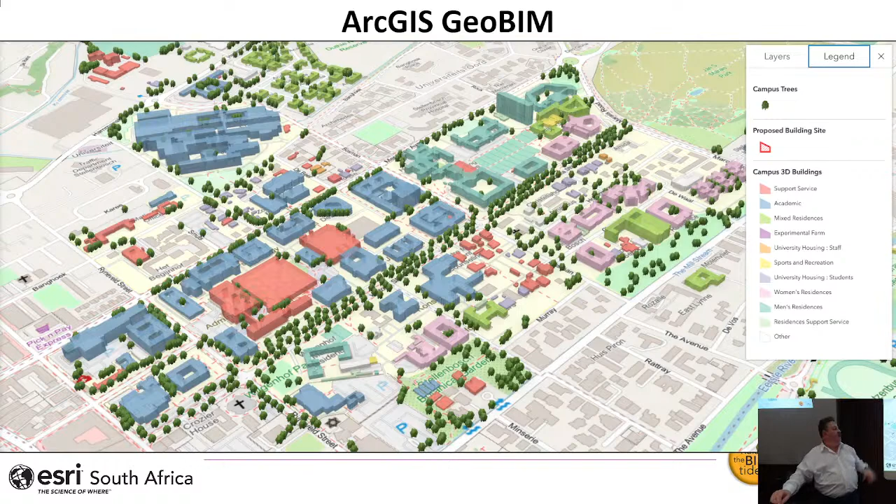So what I want to quickly show is also what we did at Stellenbosch University - this common data platform is the visualization and integration of all these different systems. Here you can see all the buildings as footprints that's been extruded, because there's no BIM models for all these buildings, so it's just an indicator of where the buildings are. You can also see we've got OpenStreetMap in the background with trees and all the other infrastructure we spoke about earlier. We can overlay the aerial photography, the terrain, everything on top of that.

Plus we can then use, as I mentioned earlier, a feasibility study or site selection tools within GIS. Here we've identified an area for new student housing - it looks at all the infrastructure, utilities and so forth, and this is the place we're going to build.

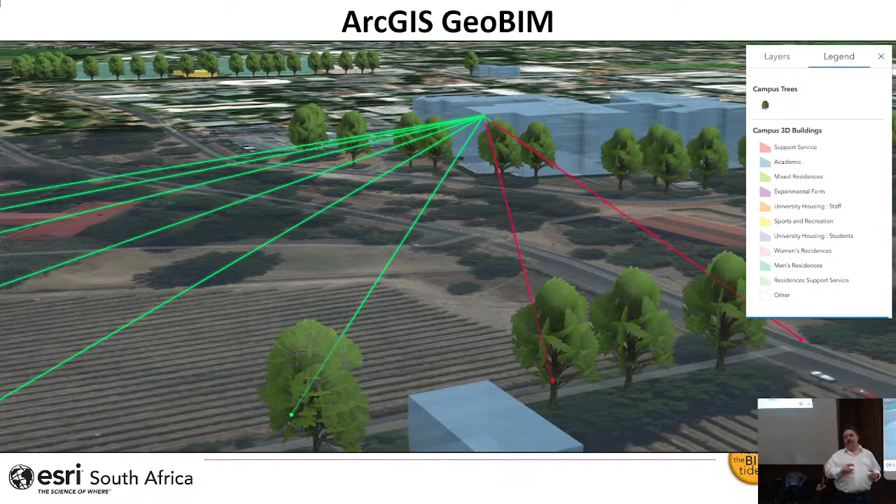And then we can also look at things like security - where are we going to place a CCTV camera? Are there any obstructions that would create a dead spot for the cameras, where more crime can happen in those areas? Here's another view, so we can see there's some trees obscuring the visualization of that camera. These are the kind of analytics that GIS provides, that kind of mechanism.

Then of course we can bring in our BIM model in the right location. Earlier we spoke about that accuracy - you don't want to see this building in the middle of the sea.

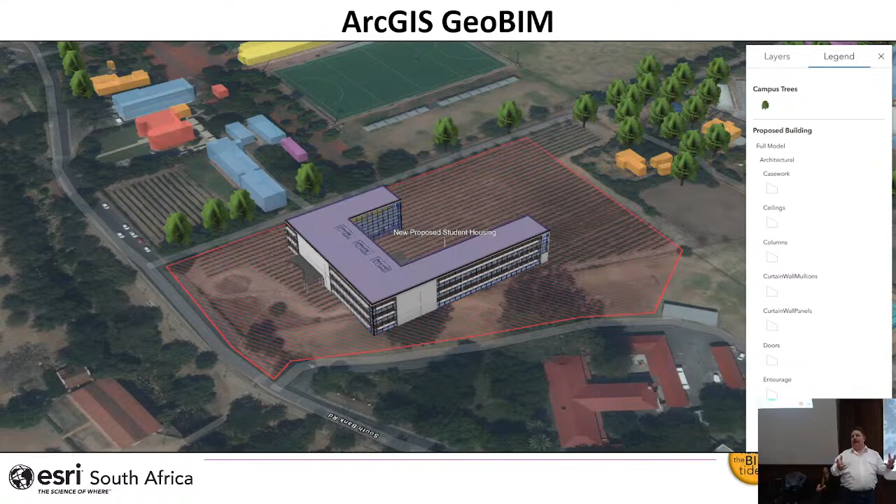So you want to be able to, when you design the building, it must be geographically correctly placed. We've seen it so many times when we work with Revit and IFC models that we utilize - they either sit in the air, in the right spot, but too high or too low, or underground. So be aware of that. That's a fundamental part of this common environment. We want to bring in different data sets that are all geographically placed correctly, so we're going to be able to plan much better.

So we can see here we have total interactive access to that BIM model as well. Now when it comes to operational management, when we've delivered the project and it's going to be operationally managed, we can have things like utilities - there's a fiber network, there's problems with the fiber network, we need to send out technicians to investigate. They can be dispatched to specific areas, take photographs, do surveys, do condition assessments, all those kinds of visualizations, and we can see how many work orders have been assigned, where the technicians are.

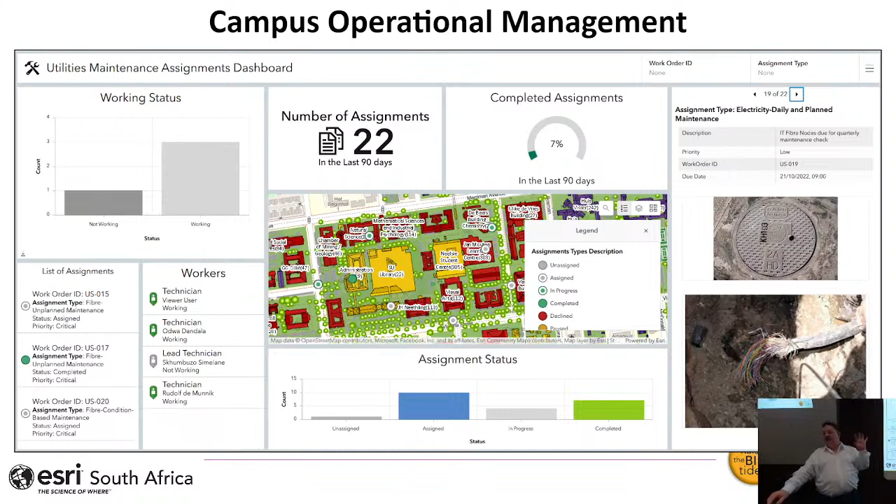So these dashboards run in operation centers, and people can visualize that. Then we also have the ability to show condition assessment of assets - where are the assets that's going to give us problems in the future? So we can start seeing hotspots of problematic, deteriorating infrastructure, pipes leaking, gas pipes like what happened in Johannesburg. So we can then start forecasting and predicting where those problems are going to be using these types of analytics.

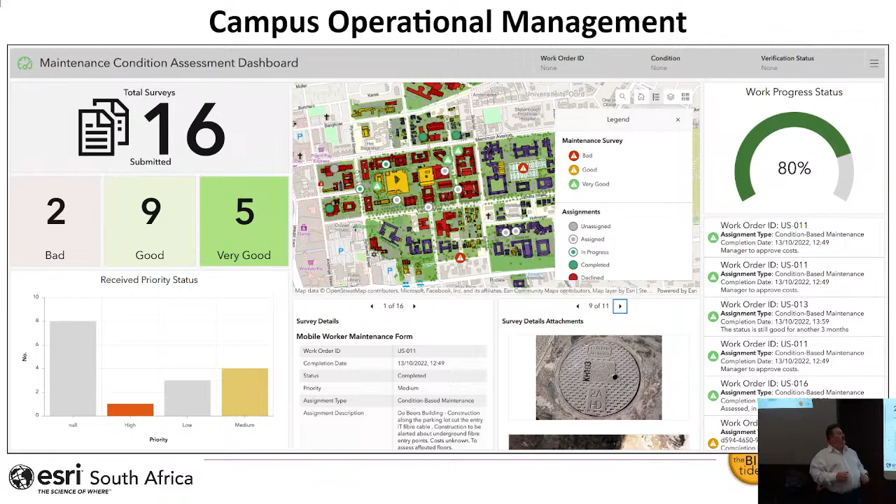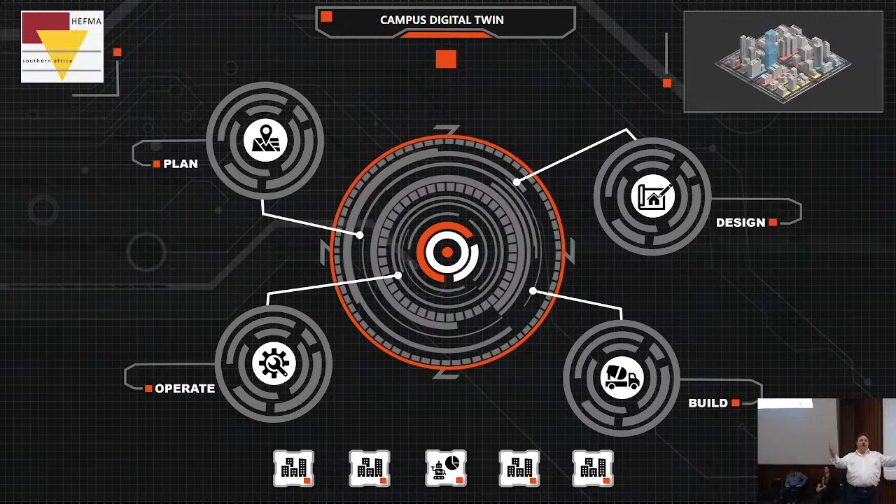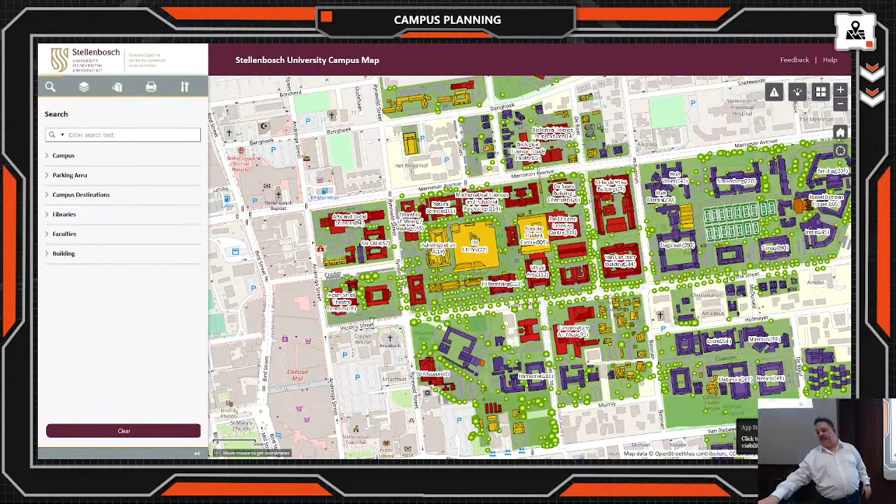So now what about accessibility, an interface so we can see everything. We've got the common data environment where all the data is available, but now I'll be able to use it like a user interface, user experience. This is something we designed as part of our software called Experience Builder. And again, there's no coding involved - this is all almost like PowerPoint, where you drag and drop and paste things on a screen. It gives you that environment that's totally accessible. There again is the Stellenbosch map embedded in this environment.

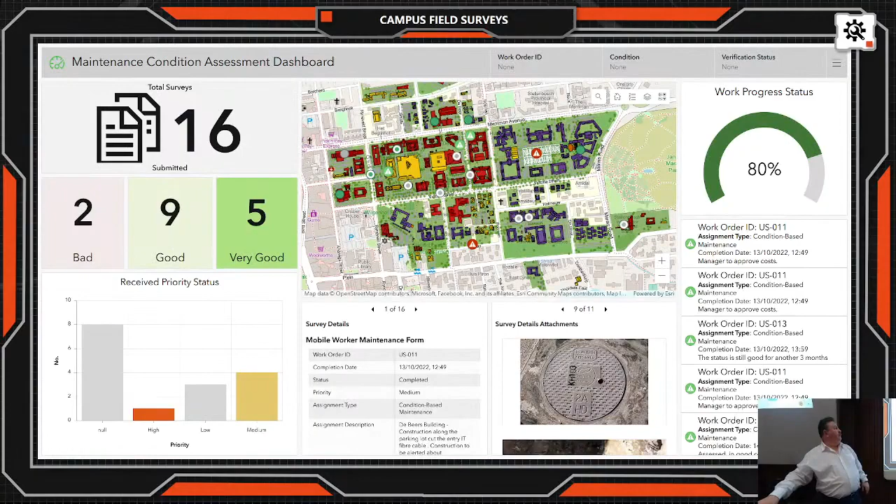We can also bring in the site selection tools, our mobile applications which are available to our field workers and technicians, and we can also embed those dashboards. It's all interactive, and we can share it to different parts of the organization - people that need access to things, and people that aren't supposed to see certain things. But it has the ability to have access to this whole environment, and the GIS is one of the tools that will help us get this kind of access control.

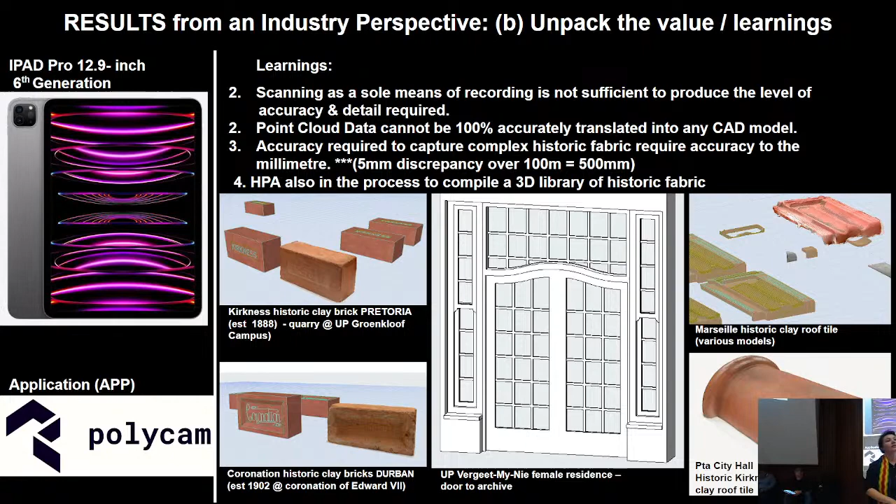All of us are living in the built environment. It is one habitat, and we will eventually need to take care of it, not just demolish it. So on one side we have heritage, and please go visit them, it's an active project we're busy with right now. We're scanning the heritage buildings of the University of Pretoria and classifying them for heritage BIM, and there's all sorts of interesting things happening about that.

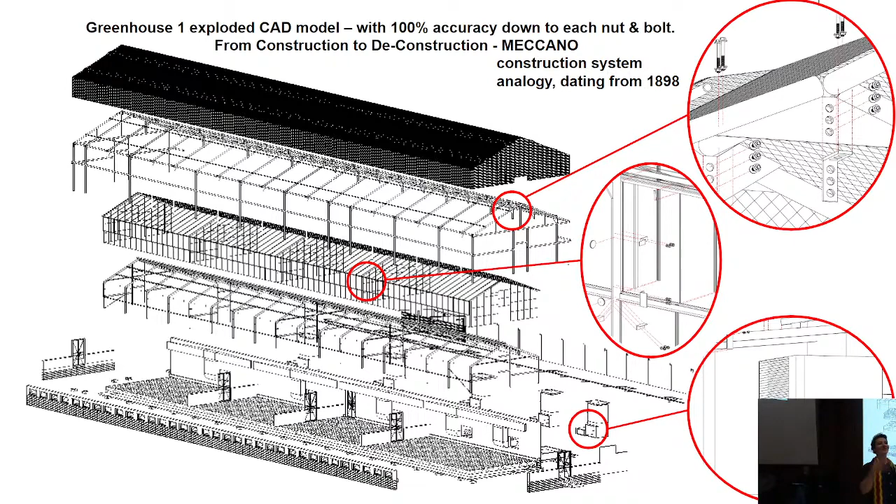A lot of this we'll discuss tomorrow in our case study, which students are also welcome to join, but it's for you teachers specifically. We need to work with heritage information, legacy information, and carry it forward to preserve, protect, or send it back for circularity and reuse. We cannot be living in 100 years in a world where we extract and mine and dump everything in a garbage dump somewhere else. The built environment is responsible for a lot of terrible junk, and we keep producing and mining that.

So stage 9 of BIM, this is a very new environment, is about saying how we stop linear work and start circulating our environment. We'll also be speaking about that tomorrow as a case study in the teaching space, you're welcome to check it out. The honors students can help you and answer questions about it, they're studying BIM for circularity, BIM for deconstruction, BIM for heritage in quite a lot of detail. Their work is up downstairs, please ask them these questions.

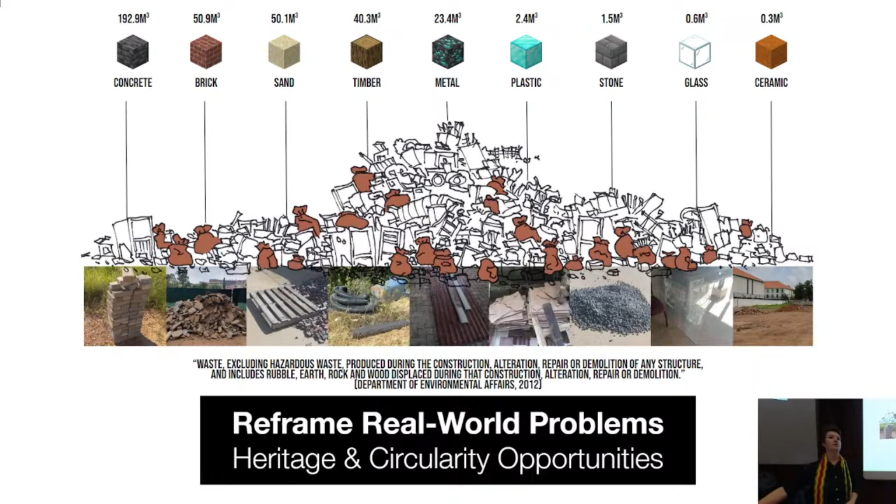How are we going to mine our cities so that we have a responsible future? How does information get mined? How do physical things get mined? How do we prepare the 100 years in the future for that world? That's what we need to do as a community, and it's not just architects or engineers or contractors that do it, it's everybody who's part of the built environment.

So stage 9 for us is we're seeing something very useful and interesting coming about. If we do better information management about the built environment, these are very powerful tools to circulate our resources and produce much more value than just today. So we see BIM and twins, which we're not talking about today but maybe next BIMHarambee, as vehicles for a circular built environment, but it starts at stage 0. It starts with intention, with that culture that we will honor these principles, and how we're going to work together to get there.

So with that, does this help? Does it help to see the whole thing stitched together? Have you had this experience somewhere else before? Does it make sense? Okay, that's what we wanted.

So for the afternoon, we're going to release you into the wild. Did you all get a sticker with a color on it? Give or take, all right. The building has been set up according to these workflows from the ground floor to the top floor. Please start every quarter to the hour at your location, and then move yourself through the building. Ask all the questions, play with the toys, make friends, figure out how you are going to be part of the legacy of the built environment. So with that, we'll let you go run wild. See you at 11:45, have fun.